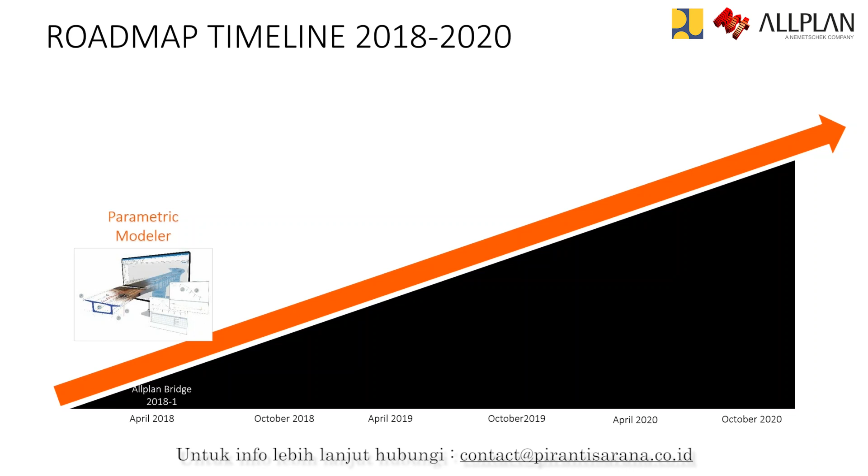It's fairly new software. It means it's very exciting because it advances quickly. The first version was released about 2 years ago in April. And at that point, you could do parametric modeling, and each 6 months, there is a new release where they build new functionality. So after 6 months, the second release, they did the parametric tendon modeling. Then they started with construction stages and cross-section calculation.

After that, they started with the analysis, so that was last October. And then in April, they did a new big step where they included live loads for your bridge analysis. Of course, there will be a new release with ALLPLAN 21 also in October, and new exciting things will be included. So we see there are really big improvements or additions going on because it's new software.

A lot of things can be added, and it started with modeling, and still modeling is improved. New functionality is added each release, so it's going quite fast. That means if you worked with ALLPLAN Bridge a couple of months ago, some new things will be there, and many new things, many exciting things are getting possible also in the near future.

When we talk about BIM for bridges, ALLPLAN also is working on including BIM for infrastructure, which is then included in IFC 4.1, if I'm correct. So they're working on that to implement it in one of the future releases.

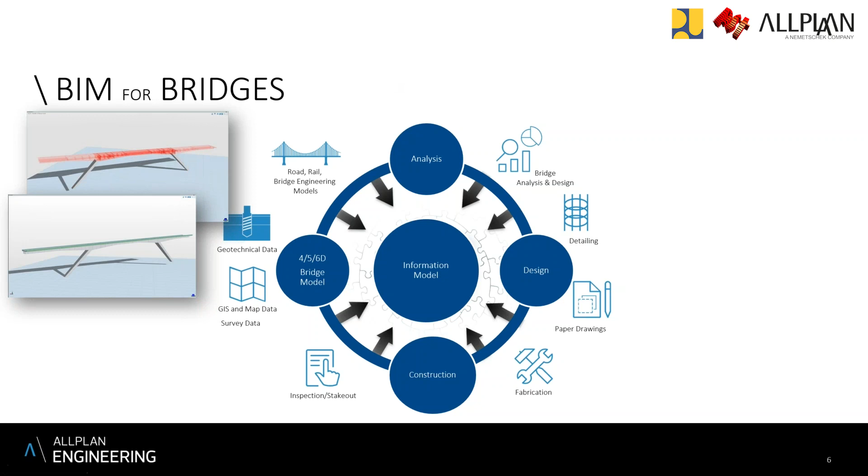Now, if we talk about BIM for bridges, we could do with ALLPLAN Bridge already the parametric modeling. We have the construction stages that can be generated. So you have some visualization. You can set this up. We'll show this later also. Analysis model. Then we have the analysis results that can be calculated. Also, with the link with ALLPLAN, we can do the reinforcement detailing. And there is one check which now has been included in the release in April, which is the reinforcement design and checks.

Okay. Now, for modeling advantages, so when you model, how does this parametric modeling work? Very basically, you have a cross-section, which is the profile of your bridge, and you have an axis, and everything is modeled along this axis. You can define then variations for your cross-section. You see here, for example, the bottom of the deck, the cross-section is being generated along the axis, but you can set variations for your different variables.

So you can control, and this is done in a very nice way. Step by step, you can introduce new complexity to your bridge. You don't have to start with a finalized design. You can start with a very simple cross-section and then add variables to it, add variations to it. So you gradually get a more complex model as you design it. So you design as you go step by step. So you have full control over it, and it's very transparent also what happens.

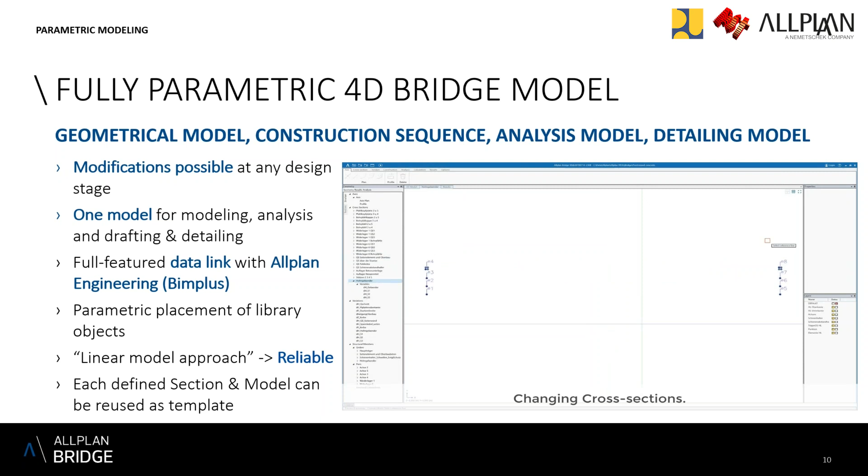With these variations that you see here, you modify something, the bridge deck will adapt to it. Your analysis result will adapt to it. The geometry that will be sent to ALLPLAN will adapt to these changes. So you control it fully by these parameters. You can see you can make the deck a little bit wider. You can add a parameter to it, so the width can also be handled by variations and parameters. Also other components like a railing and a guardrail you can add to a bridge deck as an additional component, for example.

What is also possible is with a link with ALLPLAN, you can have your library, let's say for bearings, lampposts, this is something I will show also in the last example, and you can add them to your bridge deck with the same principle of these variations, where you say, okay, at this point I would like to have a bearing, at this point I would like to have a lamppost. These are parametrically positioned in ALLPLAN.

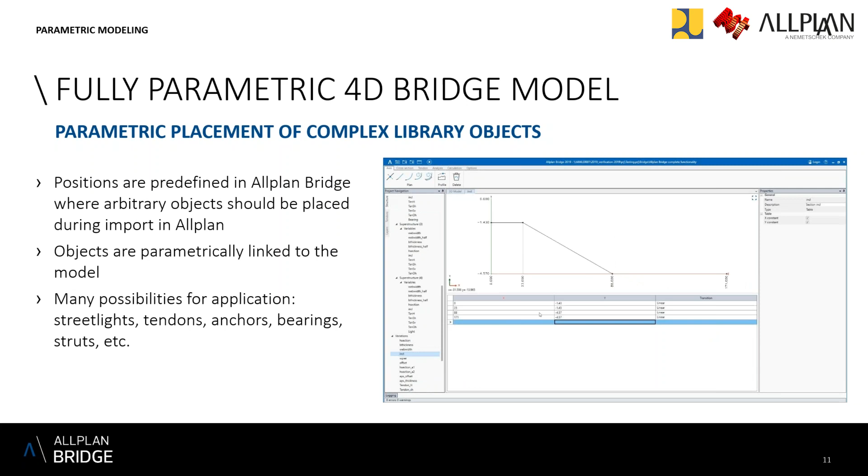So if you go to ALLPLAN and then you update your model, you will see that every object that has its origin in ALLPLAN Bridge will also be modified. So for visualization purposes, this is also important. If you change the axis of the bridge, for example, modify anything, then in ALLPLAN, everything that will be added parametrically with this library smart symbols will also be updated. So then you don't need to reposition all these elements, they just are placed by ALLPLAN Bridge.

For the tendon generation, they're based on a grid. So you can define a grid, and each of these points can then be a reference for a tendon. Same principle again, you can control the tendons with these grids and then define how they need to be used with offsets and different settings to the grid. And it's also possible to make this grid follow some variables.

So you can say, okay, I just define it and let ALLPLAN Bridge calculate the geometry for the tendon, but you can also say, I will control the tendon geometry by variation tables, where you control the height definition of the tendon. So here you can see it's just being copied along these tendon grid points. If you change the axis, everything will be regenerated and recalculated. So now there is no need to set any tendon because they follow their parametrical grids.

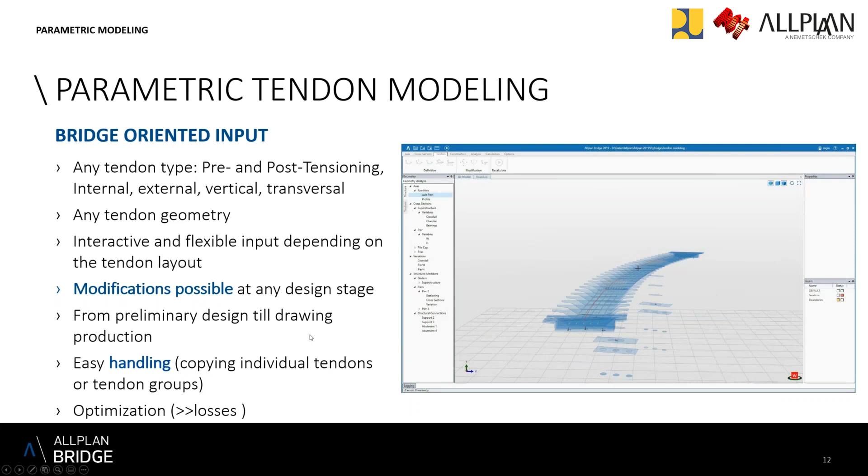If you have a tendon, then the geometry can be checked, and here you get the losses calculated. So you get a typical diagram where you see the optimal stress being displayed, but also with the slip that you have in the beginning, or if you stress it on both sides, you get different parameters. Again, the loss of the slip is being calculated. So from the tendon being stressed from one or both sides, you get a diagram that clearly shows what is happening within it. And this is also automatically calculated.

For a cross-section, these cross-sections can be generated from scratch. You can also say, create my own library, so you can easily reuse them again. And here you see it's a fairly simple cross-section, but has a lot of parameters. That means all these parameters can be variable. So you can say I have a typical cross-section, but that you can still modify and change to make it possible to have many different types of the same typical cross-section.

Also, for example, for steel cross-sections, there is a possibility to add the stiffeners, and this is a system that can be used also for other types of objects, where you define, let's say, a subcomponent, and the subcomponent can be used and then be placed as a kind of placement, like we saw yesterday with reinforcement. You have an edge and you place it along the edge.

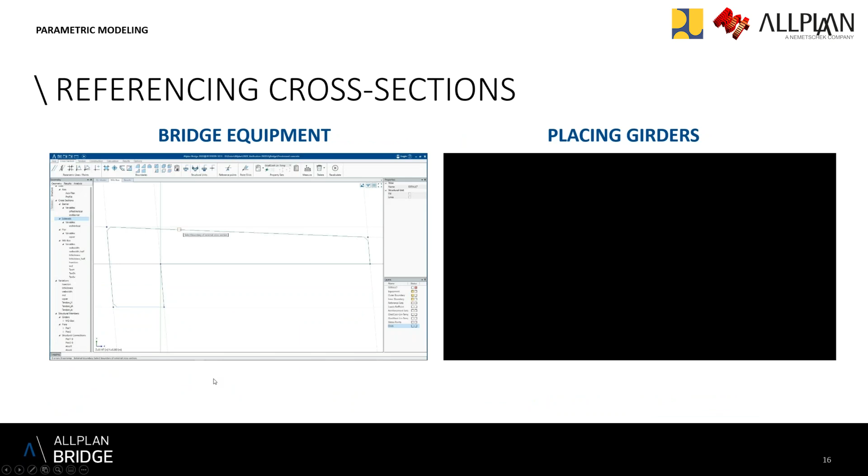Here we have two other examples of these possibilities of referencing another cross-section. So for the bridge equipment, like the sidewalks, things like that, this can be typical. You can take them from another cross-section and then insert them in the existing model, also like a barrier. So it's possible to reuse many different things that have been designed before, so you don't need to do this each time again, and you can take these basic components as a part of a cross-section and add them to your existing cross-section.

Same thing for girders. Depending on what type of girders, steel, concrete elements. You have your cross-section, define it, and then place it, and then if you update one, the other ones will also adapt, and you can then place it in your existing cross-section easily.

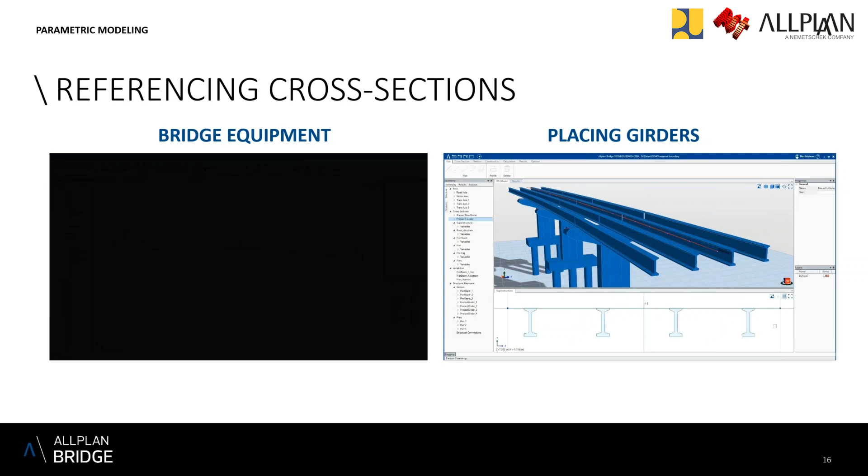Also possible for really complex types of shapes. Yesterday we saw the Tamina bridge. The supporting arc is actually also following this principle, where you have an axis, main road axis, but from the side you can also have an additional axis, which in top view can be a radius here also, and then also from the side view you have another radius. So it's possible to generate objects linked to multiple radii.

That means you don't have to define all the parameters, because this could be a parameter where you say this is the main axis, this is a width parameter, but then you need to define all these parameters. It's possible, but you can also say, no, this is just an axis that needs to be followed to the side. So all points here, parametrical points or lines, will be linked to this axis. So this is also something that adds a lot of flexibility for these complex elements.

Then we can define construction stages. So if you model your parametrical bridge model, you can then define how it should be constructed. This can be done for modeling only. So if you go to ALLPLAN, then you can see these different elements, and you can create a visualization from it with renderings, for example. Here you can see some kind of flow through the process where the different stages are being animated.

Important is these construction stages can also be used for analysis. So if you have a specific construction sequence with tendon stressing, for example, or cantilever, then this can be

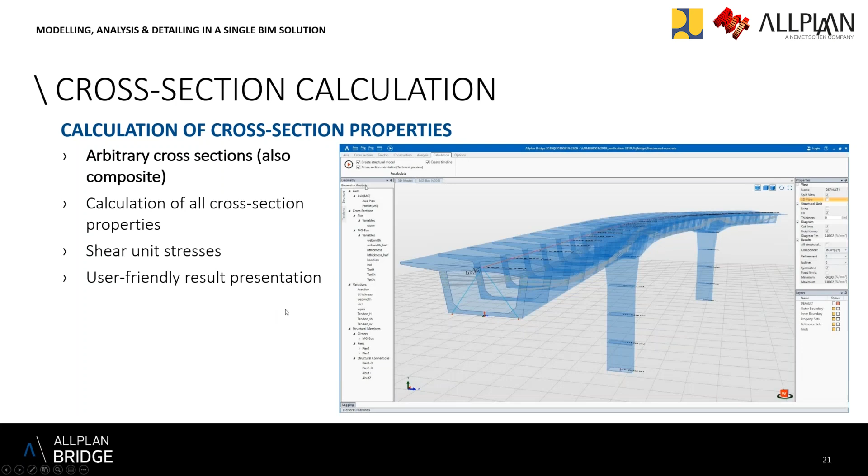For the cross sections, you have your bridge model, which has its cross section. These are also automatically defined as soon as you calculate, and for each variation of the cross section, for each station point where there is a variation, the cross section properties will be calculated automatically.

Here for the construction sequence calculation, it's already for modeling what this can do, and here you can see then a simulation where also the analysis is being included. So then you can see construction sequence, cantilever direction, and then you can see these forces being displayed.

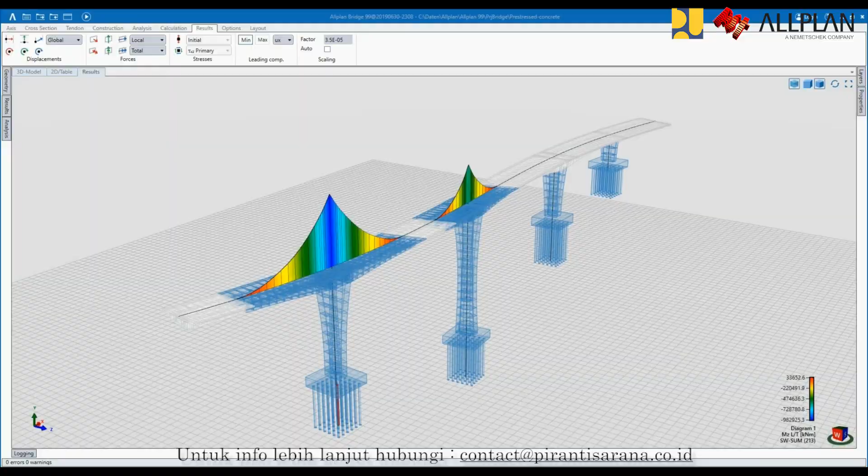Also possible with this is that you have multiple construction variants. So depending on the design or construction you choose, you can have variants which you can compare with each other. So if you choose one construction sequence or construction variant, you can simulate it, or you can have another one which can have a different order, and then you can compare them with each other. You don't need to create a new model. You can just create alternative or variant construction stages from one model and then compare the results and do some optimizations.

We have the superimposed dead load. So when you create a section, you can have in your cross section defined elements which are the actual member, or you can say these are additional elements which are just generating a load. So it's not part of your structure for the analysis that defines the strength of your bridge. It's just a load put on top of the bridge. And this is also done when you create the cross section. You can define this element, this barrier, is just a load.

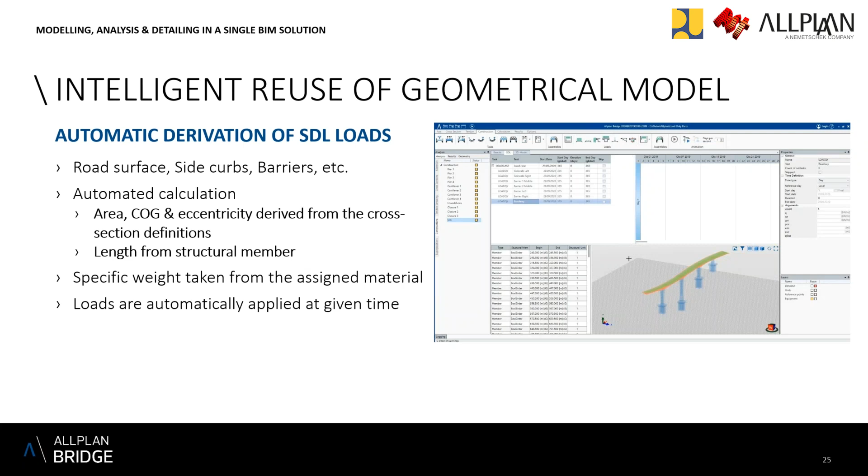Yes, and then it will be included also, for example, in your construction sequence, where this load will be set at a specific point in time. You see here, sidewalk, for example, this is just load that will be added to it. In the cross section, there is this color code also: blue is the general members and green is the additional dead loads being added to it. So again, you start from the parametrical model, the geometry, and then for analysis, the same information will be used.

Then we have the superposition, where you do the combination of different cases, and you can add this in an intuitive way, like visual scripting, where you make these nodes, connect them, and then make combinations so that only the worst case state will be used in the final analysis, for example. You can set this up and then reuse this combination or this canvas for other projects also. So you can create some kind of flow charts of how these combinations should act and how they have to be used, and it gives you a very good overview.

Presenting of the results: for the analysis, based on your 3D model, you can activate the representation, so you can see a deformation, for example, depending on the different envelopes that you have defined, like temperature or wind or the sum of the loads. And then you can also define color coding by the surface or use some diagrams. You can choose which combination you would like to see, or multiple of them, one next to the other, and then you get a good overview of this representation.

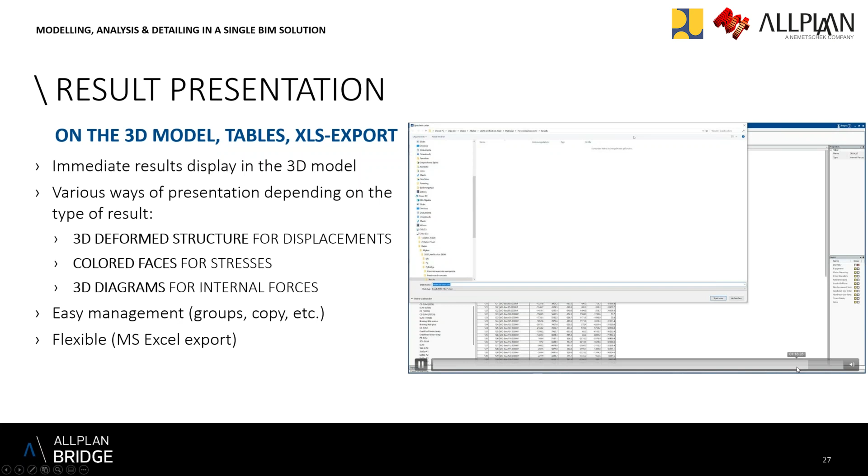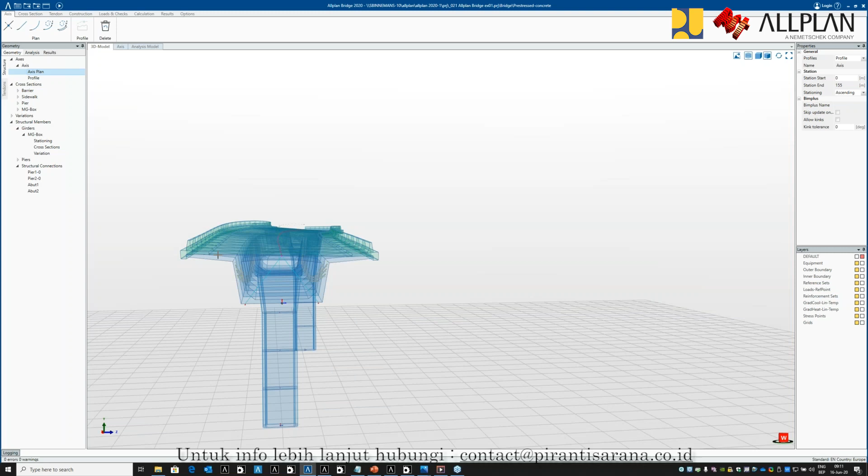So here now we see that the bridge has changed. We see that in this case, the axis has changed, but the super elevation at this point is not right because it is for a turn that goes the other way. Okay, you can have control over all these parameters individually. If you want, you can also link different parameters with each other.

Maybe at this point, because I rechecked the analysis model, for the analysis model, we can also go to the results, for example, of the cross section. So here we have the cross section and we have the different variations. And if I check here variation, then you will see this display of the cross section calculation with the different values. So you get this here for each different variation.

Then you can see clearly also how the super elevation changes, how the height of the cross section at that place changed. So you see it very well, which one is being used here in the 3D model, and you get the results right here and all the values. Okay.

So let's do another check here. I'll first generate the geometry again, maybe change the axis back to its original value. So minus 200, enter, and then we can see the original situation again. We have the axis, and at the same time we have the profile. So the profile is along the length of the axis. It's 155 meters. You can set heights.

So if you check the results, for example, you can choose to highlight different combinations. So let's see if I have my analysis model. There, yes, okay. So we have 3D model, analysis model. So depending on what combination you choose here, you will get a different part of your model and different visualization.

So for example, here in the bottom, I would like to see the wind loads. Different types of combinations have been set here, without traffic, with traffic, for example. So we can highlight it. I don't want to see the diagrams, for example. I would like to see the deformed structure, and then you choose here what case you would like to have, and then you can visualize these different parts.

Okay, so if I go up again, we have here the tendons, temperature, braking, wind, so different types of elements that you can visualize. And here you can choose then what load cases you would like to see, for example. And then depending on the diagram you activate, you will see some different element. Yes, so you have full control over the different parts, and you can just activate which one you would like to see.

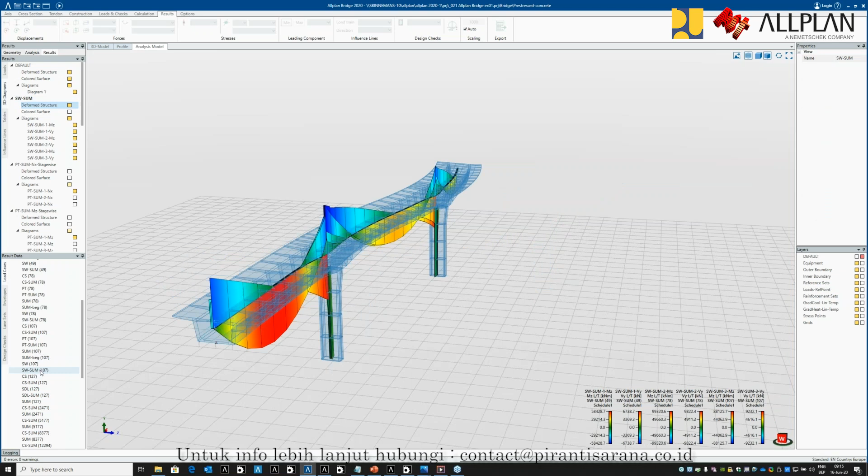Okay, so here you can see, for example, the deformation also being set. You can play with these values to see exactly how it's represented. And then, for example, I don't want to see these diagrams. You just want to see the deformation type for wind, for example. So you can choose what elements you would like to see, how you would like to visualize it to give you a good impression of the things that will be happening in your model, and compare the analysis results.

Okay, so let's go back to the 3D model here, the geometry. So we've seen axis and plan. And then the next step would be taking a look at the cross section. So in this cross section, main girder box, you can choose any type of name you would like. And here we have all the different elements that are defined in the cross section. So we have our main girder, and then the additional elements being added to it, like a barrier, for example, which are not part of the structural element.

Everything is defined by reference points and parametrical lines. So you see here these gray lines, parametrical lines. What does that mean? It's how I can control how this section behaves. For example, the one here in the bottom, if I click on it, you can see possibilities, and I will change the distance. And now if you change the distance, you see what happens here.

The web on the side will just keep its own orientation, but the main girder will become higher. So the cross section will become higher. But if you see, also the bottom will actually become smaller or less wide because the angle of the web is fixed. So you can define also how the different elements should behave.

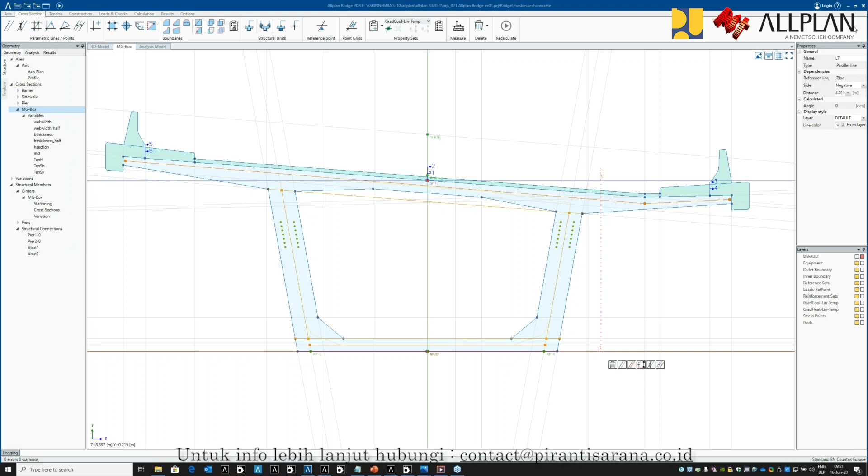So cross-section, main principle: you have your parametrical lines and reference points. You then define a boundary which uses some of these points, and the relation between the parametrical lines will be kept and will define how your cross-section will vary. So we see here, this is linked to a variable, and I would like to move this part somewhere down. Yes. So you see here that this is linked to a parameter, height of the section.

So what does this mean? I can define in my main girder a height of the section, or whatever name you give it, doesn't matter how you name it, which has its own, let's say, default value. And then when you assign this variable to a parametric line, you just do this also here.

You can say, okay, it shouldn't be assigned to any, or it should be assigned to the height of section variable. That means you can control it now outside of your cross section. If there is no variable set, then it's just a fixed line. You can modify it here, but you cannot control it.

So this is important when you design and get more detail, more depth to your model, that you will be adding variables to it. You don't need to have it, then you get a fixed model which doesn't vary along the axis, for example, but you can still modify it here. So if we check again the main girder box and the variations, so we are in main girder box cross section. This is the girder.

So if you check the cross sections, we see here again which cross section is applied with the variance and variation. Then we can see what variables from the cross section are actually being used in this 3D model. So here we see height of the section, which just comes from the cross section. Actually, each one of them will be visible here. So you see web width, half, bottom thickness. These are all variables coming from your cross section. So if you generate it in a cross section, this will be automatically added to the tables here. You don't need to do anything.

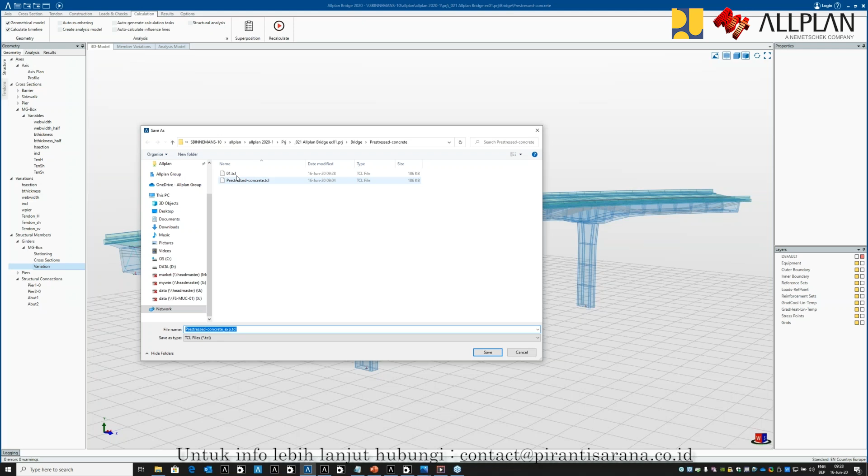What is also interesting is that ALLPLAN Bridge has an open interface through a TCL file. This is a text format that you can read and just modify. So if you want to have external access to this file, you can save this project here, let's say as 01. And I will also open this file with a text editor. And then you have all the descriptions here, from the axis, from the cross-section, from the variations, described in this text file.

So you see, okay, this is the axis, the profile being described, and here we have already the variation. So the height of the section, we see this is this 8. So I can change this in the text file and put it again to 5.2, for example. That means you can copy paste things from other software. You can also play in this text file to do some optimizations, for example. Okay, so save the file, I don't need it anymore.

And now I can import it. So remember, this is this 8 meter. I can import this file again, just modified externally. Do I want to regenerate and overwrite? Yes. And now the full model will be regenerated. And now you can see again that this is the correct height. So this can be an interesting case where you have this open interface that you can use to change the values and adapt some elements just by accessing a text file.

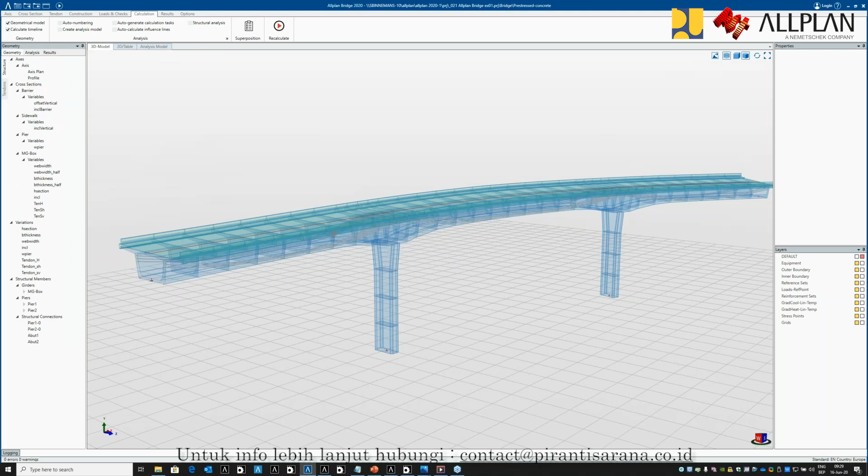Okay, about the tendons here. So we have the tendon generation. We saw in the cross section that there is the tendon grid, a point grid here, and the tendons are used. And when you define the tendons, you can choose what point will be used. So let's take a look at that. We have these tendons here.

You can see that it seems there are redundant points, but this is because you have different stages and you also have tendons which are overlapping. So probably stage 1 goes there, where you have the end of these tendons, and then you have another where the tendons are already embedded in the structure for the next stage. So these tendons are defined on the points, and because you have multiple points, you can choose which one you would like, and then you have enough space for the other tendons to go in between.

So it can also be controlled by parameters if you need more distance. I think we will see this here. In the middle, they will be very close together, and here where you have multiple tendons connecting together, you have a bigger distance between them. This is also controlled by the variation tables.

So you can define a tendon in different ways. You can set it through points without having the points varying, but here you can see there is some variation going on with the height of the tendons, probably with the distance between them in 2 directions, and this is what we've set here as a variation table.

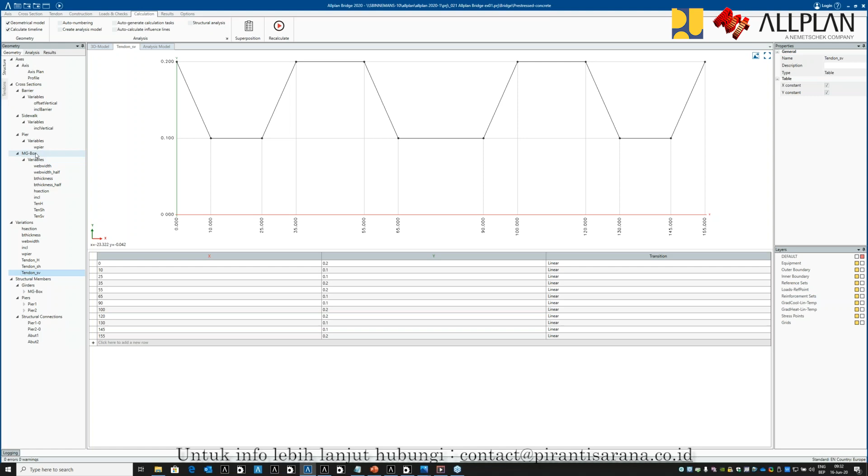So same principle, if you check again the section, like you had with the parametrical lines, same principle is here with the point grid. You can see the offset here, or spacing, is defined by spacing horizontal, and spacing here is controlled by spacing vertical. And then the offset that we have here, there is no offset horizontally, but there is an offset vertically. So this is the height of the tendon grid, where it's positioned so that it flows along the 3D model from the start to the end.

Yeah, so same principles of the parameters and the variations that you can set. You can start with a very simple cross-section and add to it for the geometry, add to it for the tendon grid, and then add variation tables to see how they will be controlled.

Now let's dive into one of these tendons. Here you would like to have, maybe depending on what kind of construction you want, do they need to be stressed? At what point do they need to be stressed? Do you need to have blisters or a wall where this web would be thicker, so the tendon will be outside of the wall a little bit, so you can still have access to the anchor and stuff. This is what we will check now.

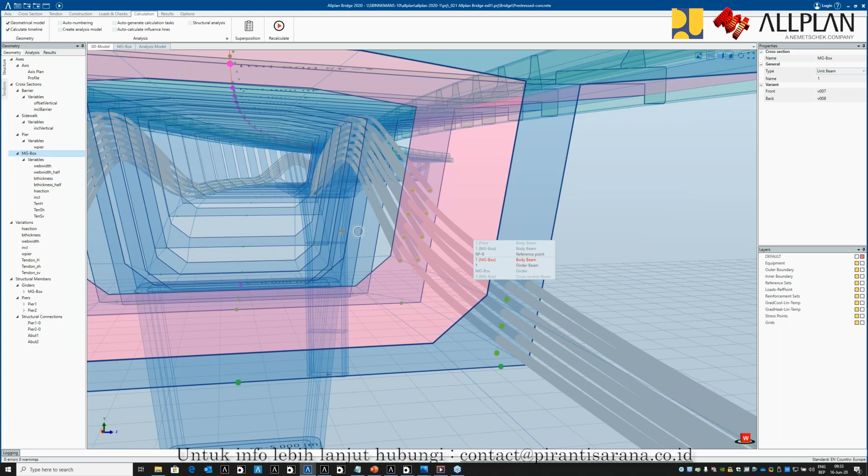So for the tendons, you also have different phases for the stressing and stuff. Let's just go in the modeling of the tendons here. So we have the view of the tendon model, where for each tendon, let's take this one, for example, you see this tendon being highlighted, and you can see also its parameters. So at this station, which grid point it uses, you can see it here in the cross section, and then you can go through the different sets.

So if I look from the side, for example, you will see that it jumps from one point to the other point for each segment, and then you can check here where it's located, and here also, so you can see it going through these points, and this is what the tendon will follow. You can still interact with these points, so you can even change the grid point, that reference point that the tendon uses. If you want to switch it from there to there, you still have full control over it at the end.

An example that I want to show here is for this tendon that we have here in the middle, for example. And I will zoom in on this number 4 or 5. So this tendon here at the top. I'll zoom in a little bit. So we see this tendon here. And then I want to see where it will be going on the inside of the wall. So we see here it's still inside of the web. And I would like it here to jump a little bit on the inside.

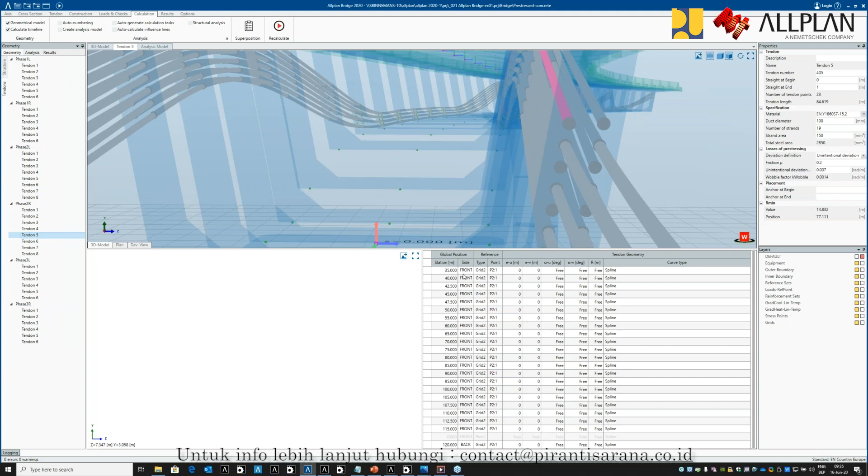So what point do I need? I can check here from the station point. You can see here this is this point, and now I can change a value where it should deviate from its position defined by the grid. So let's say this should now, and I always forget if it's plus or minus, be 1 meter to the side, and then you can see here it will be located there.

If I regenerate, maybe this is a little bit too much. Let's say 0.5, and recalculate. Oh, sorry, that's the wrong recalculate. Then you will see it being generated. So here you can see now that the tendon is positioned there. I wanted to show it right here in the tendon geometry definition. So there you can see also that it's now being positioned like this.

It will still follow the grid. It's just that there is now an offset defined. So no need to define this in the beginning. You can change this afterwards depending on information that you gain, like anchor type or whatever you need to be able to construct them, to see this also in a detailed model. So you have full control over all these things, all elements and all parameters.

Okay, I think this is enough here. Maybe there is some result for the tendon that I can show? If I select it, a PDF document can be generated. I'm not sure if I did the analysis.

So here you have the overview of the tendon definition, and you can also see how it's being generated, like a table and a schematic of this tendon. Same thing that I showed in the PowerPoint. The tendon losses can also be generated.

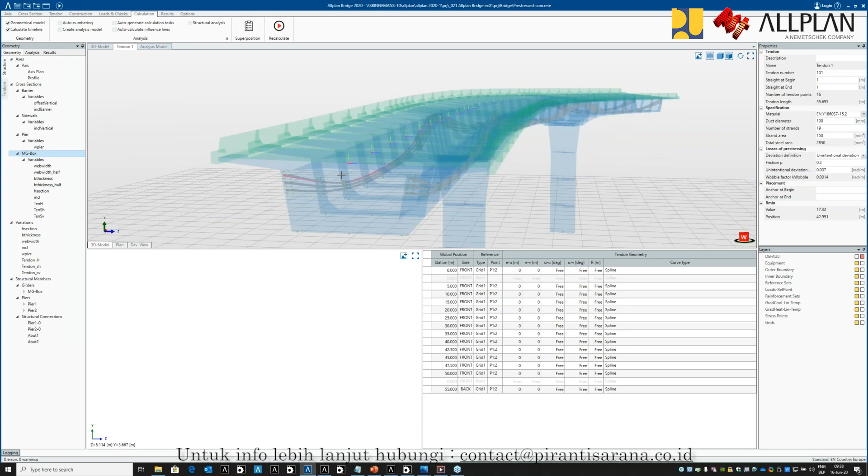Because if you want to have the super elevation, you need to have the speed set, the type of vehicle set, the surface set. This is not something you calculate in ALLPLAN Bridge, if I'm correct. You can just define the super elevation in any way you like. So if somebody does the calculation and says we need 3% here or 5% or 10%, you just input the values and the model will be generated depending on these values.

Can you show how to create the super elevation in this model? Yes. You don't have to do this in the beginning. You can add this later, but you need a definition of a parametrical line which defines the inclination or the super elevation. In this case, this is implemented, and this is the line that makes it possible to define the super elevation. This is the line that can rotate or change the inclination.

There is also a parameter set to it. If you check here, we can see this is the inclination. And you can say it should be a fixed inclination here. Doesn't matter too much right now, this is just a definition. What is more important is that when you have the inclination, you can control it through this variation here.

So now we said we have an inclination. I think this is in degrees, where it starts at station 0 with this value, at 15 meters this value, 8 meters this value, so it just goes from this value to the end. And this is what we will see in the 3D model. But if you change the axis, you should also adapt this. So here we have the super elevation right now.

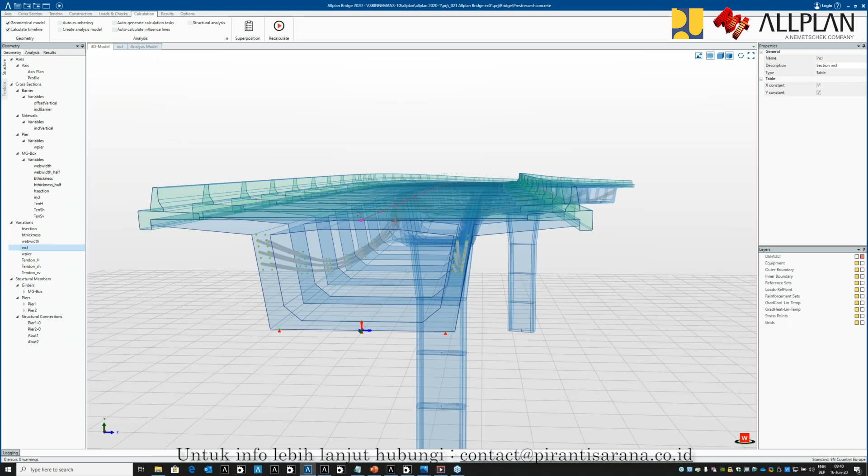And then you can change the inclination again and say at the beginning I would like to have -2, -2, and it should go to -8. Something like this. So you can control it with different values at any point. You will need to add the station points. Mostly these are not too many: you have a straight line, a clothoid or spiral, and a circle. For these points, you set how the super elevation will change, but you have full control over it.

So it can be on a straight line, for example, you can change from minus to plus. It's just that you need to input these values here. And then if you regenerate now, the model will take into account the super elevation that I've set. So you see here now, this is -2. On the other side also, this is a little bit more, this is -5. Everything will be regenerated. So it's just a question of adding the right value to the table.

But it's user controlled. So the user has control over this. If he wants to input a negative or in the wrong way super elevation, this is possible. Yeah? So it's up to him to define the right values here. That's the answer to the question? Yes.

Is it possible to show how to import LandXML, let's say, into Allplan Bridge? This will be shown tomorrow. I can quickly show how you would do it, but I will not do it because then I will need to generate a model, but we have this prepared for tomorrow. So this is done by Bimplus.

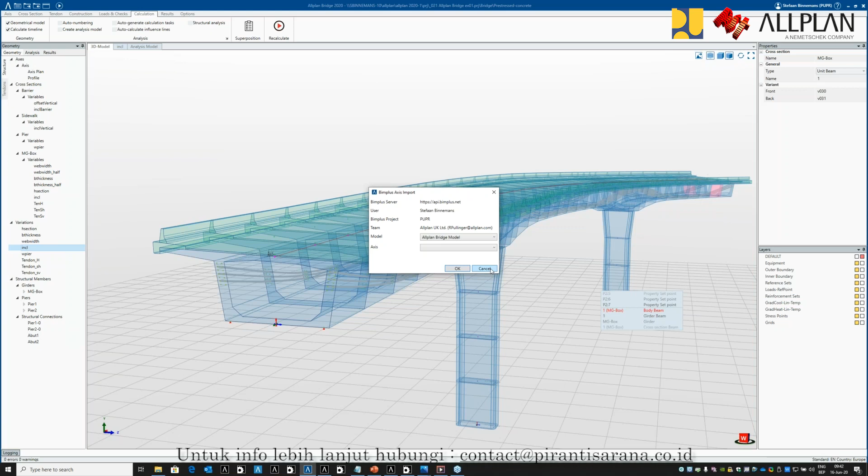So the thing is, this is generated in Bimplus. Somebody uploads the axis in Bimplus. You connect here to download it, and then it will be used. The horizontal axis in plan and the profile will be used. You can have multiple axes that you import, and they can also be updated. So if the model updates with a new revision of the axis, you can also update it in Allplan Bridge. So the link is done here through Bimplus. Yes. So this will be shown tomorrow. Okay.

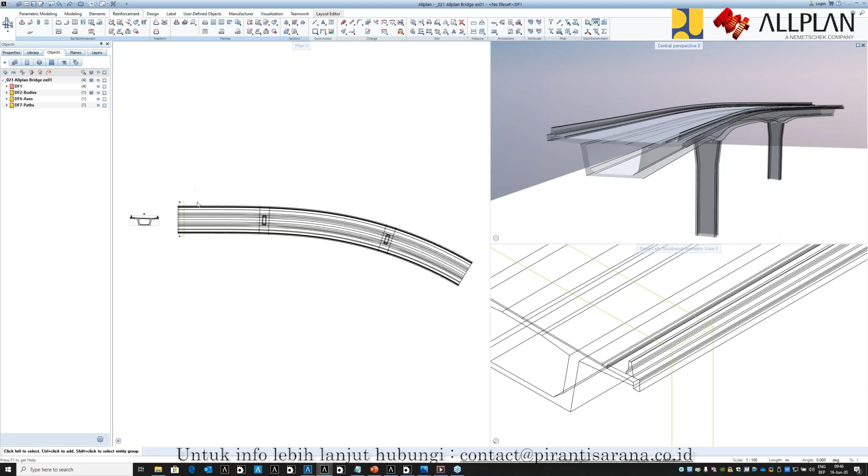But what I'd like to show here is, remember yesterday, there was the sweep functionality that I've shown, and it uses edges. Now, what is interesting from Allplan Bridge, you can see these lines. These are actually the edges being generated in the Allplan Bridge model. So they can be transferred. If you prefer, or there's a setting, you can transfer them to Allplan and you can use them to create your rebar.

So when you generate a complex double curved model in Allplan Bridge, you don't need to define these edges by yourself. They are just transferred, so that makes it efficient to reuse them for your, let's say, typical reinforcement in that section. So I have here a section for the bridge. I will just define a bar shape, not a realistic one. It's just to show how you can control these edges. So I will create it here in this section.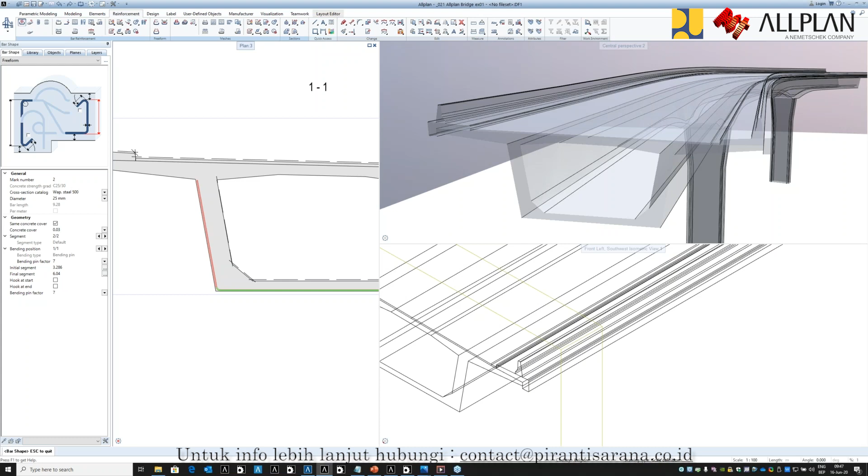And right now you see it will follow this edge. So here at the top, this edge, this one in the bottom here, and then this one also in the bottom here. So we'll see this variation going in height, in width, because it's getting a little bit thinner here at the bottom, and so follow also the orientation of the web and become then higher here above the pier. So we have a lot of variations, and the axis is also double curved.

So we will use this same sweep as yesterday, sweep bars along. So choose the bar, and now we have to choose the axis generated by Allplan Bridge. So the main path is the main sweep here, the 3D spline. This is then the axis. And now I will use the other parts to define the geometry. So this one here, you can see that it will go from the start to the end. In Allplan Bridge this is segmented, but you can select it easily all at the same time.

So select this one here, you can see the top, do the same thing for the one in the bottom, and then you can see that it follows the bottom curve, and here the edge on the side also for this one. And then you can see this is also following this curve. So now I will create a 3D reinforcement along this axis and following this definition of the edges.

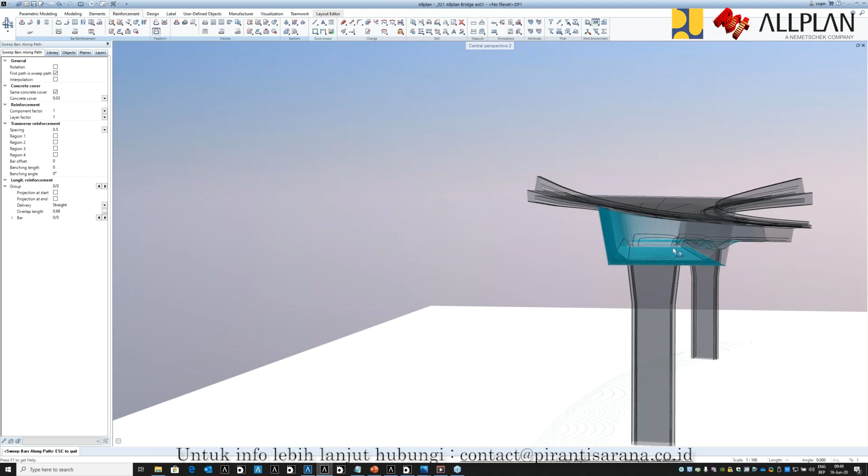So, okay, let's say change, so this is now 1 meter, it should be 0.5 meter, for example, and then you can see here that everything adapts quickly to it. So you see it follows the edge here, follows nicely the side, it follows here the bottom. So we'll make this a little bit bigger. So with just a couple of clicks, you reuse the geometry definition from Allplan Bridge to create reinforcement in it by just clicking the edges.

Okay, now let's go to the examples. First one would be this cable stayed bridge. This is not a real bridge. It's just a design based on an existing bridge that has been reproduced in Allplan. So actually everything that you see here is generated from Allplan Bridge except for the water surface. This was just something in Allplan.

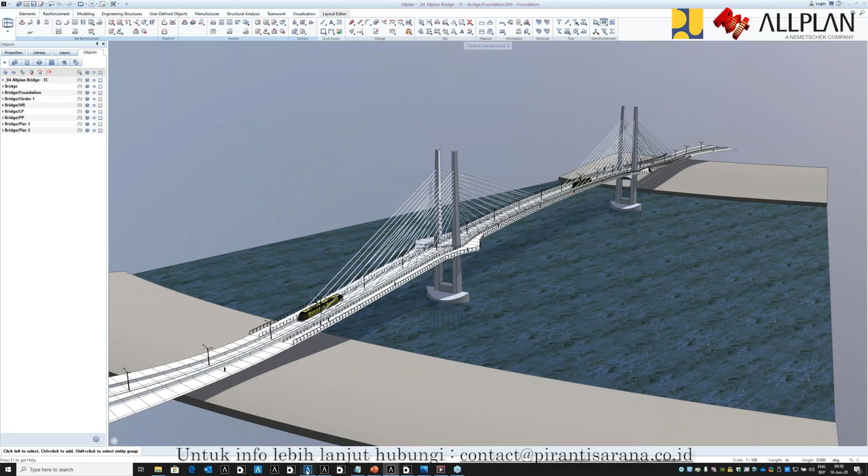But what you see here is you have the rail, the railing, handrail, you have the cables, you have lampposts, you have vehicles. Everything is generated from Allplan Bridge, with this smart placement. So it can be quite detailed. And it's parametrically designed. I will now show this in Allplan Bridge. So open, see if I have the project ready for it. I will get just the TCL. So import TCL. And so, yes, open the TCL.

Now we have this model here. So what I would like to show here is maybe the different parts. What you see here are multiple axes. So I have a main axis for the bridge. I have one for the bottom to define the positioning of the piers, I think. And I have a secondary axis. And imagine in this case, you have your fully detailed bridge, which can take some time, but then there is a modification in the axis, or there is a variant axis, which is also interesting because you just don't want to modify the axis.

Maybe there are two positions where this bridge could be created with two different axes. And then I can modify this, so here we can see there are two axes, main axis 1, axis 2, and this is the bottom. And let's say I would like to have everything moved to the other axis.

So my girder, oh, this is the people placement. In Allplan you could see there is this person object being placed along the bridge. So this is with a variation, the train, the lamppost and stuff. So there are different elements in Allplan Bridge; you see all these black dots. These are actually the smart placements. So maybe I can go into detail a little bit.

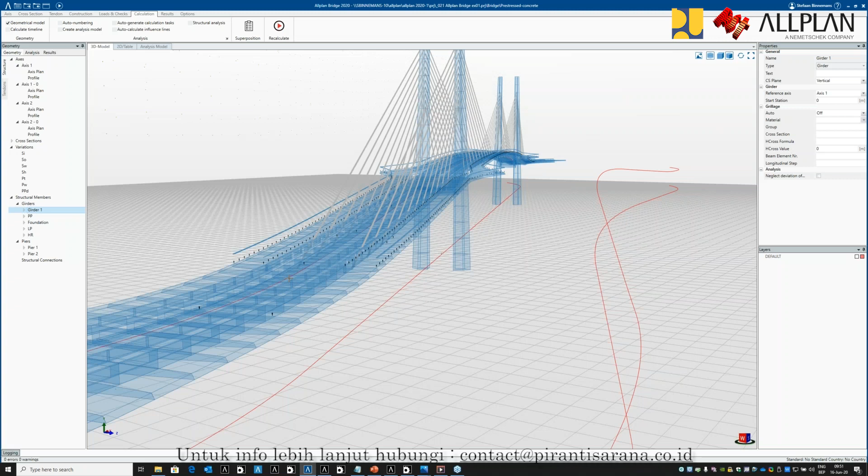This is the handrail, for example. Then you see in the variation that there is a handrail, and this is where the handrail is positioned. So at every station there is a handrail positioned. For example, if we take a look at the lamppost or the persons, here you can see where they are defined. So again, controlled by a table.

Now let's see what happens when everything has been defined, like the main girder, the piers, the cables, if I change the axis. So I have here my different elements. I just select everything. You can see here girder 1 is linked to the axis, so I can choose a different reference axis. I will select everything here. It should be reference axis 2. And the foundation should then be linked to this one in the bottom.

Okay, so now if I regenerate, the model will be regenerated along the other axis, and everything will be recalculated. All positions will be regenerated, like the positions of the cables and the handrails. We can see that the axis is different if we look from the top. The start is similar, but this one is straight and this one goes to the right and then to the other side again, but everything follows nicely.

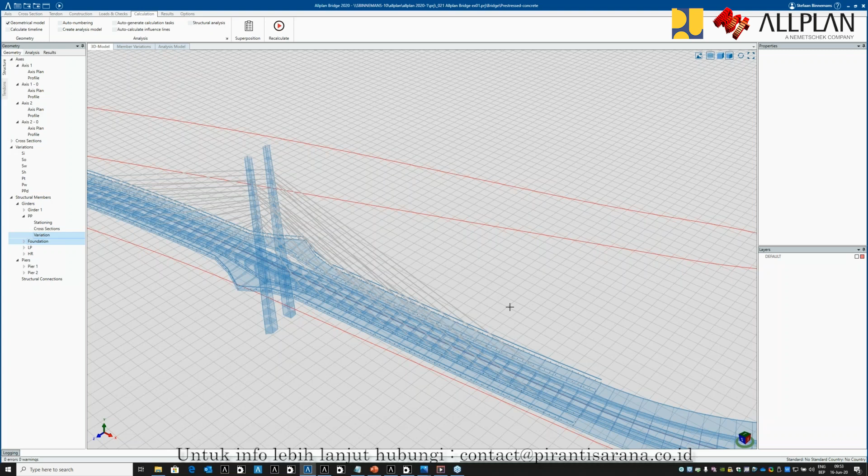So I can quickly change this again. Let's set everything again to axis 1, variant 1, and then the different elements, variant 1, regenerate. And then you see it's being regenerated again at the original position. Oh, didn't work. Like this, yes. So this is something that can be easily done. Okay, let's go to another example. There. Go ahead.

Okay, one thing before, there is a question. When you create girders in Allplan Bridge, you already create them segmented, but when you import to Allplan Engineering, it becomes one. Is there any way to make it easier to be exactly as what you model in Allplan Bridge? So there is the difference between a general model and what you would like to see in Allplan, which would be construction stages.

And if you define construction stages in Allplan Bridge, maybe I will just take another example. So if you go to the construction stages, there you define how the element will be split into different segments. So we have another example here. Let's take a look at the construction stages. You see there are different phases here. Oh, that was not the right one.

So we have these different phases, and each phase will be a different object in Allplan. So this could be a way to split it. If not, then it will just be one main girder. If you do it by these construction stages, then this will be split. So now we play the full construction, and you will see the pier being generated. Maybe I can make it a little bit quicker. This is one segment, this is another segment. So each object will be its own element in Allplan.

So this is a possibility, and then we will jump to the deck. Here you also see a pour. This object will now be one segment because it has been defined in the construction stages as one pour. So I would say the construction stages for the modeling detail is where you define how the different segments will be created. Or this is one way. Yes?

Okay, go to the next example. Same thing, this is not a real bridge. It's based on an existing bridge design and just remodeled in Allplan Bridge to visualize it. Here you can see this is about 800 meters long. It looks a bit like the elevated highways we see a lot in Indonesia. Maybe the span is about 130 meters. I think that is similar to what I've seen.

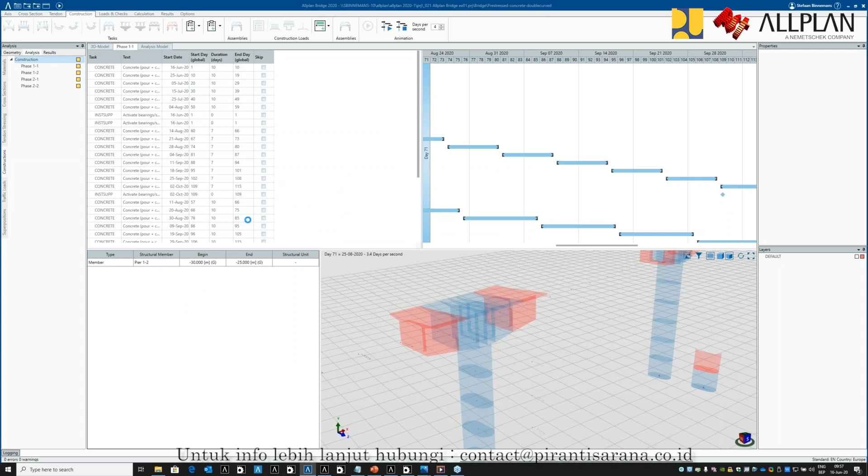So then you get this model here in Allplan Bridge, where you just have a cross-section defined, main cross-section of the bridge, for example, where it's like double deck or two girders, but can be actually constructed as in one sweep because the axis could be the same at this point.

And for the piers, we have a couple of cross-sections because there is some variation going on. So if you check here, there is a variation. Maybe I can turn on this here so you can see it a little bit more clearly. So there is a part where this is closed, there's a part where this is open, and then there is a part where you have another type. So this is one pier generated, but with different cross-sections.

So if you check the pier in the bottom, that would be this cross-section. Yes, here in the bottom. Then we have the pier at the top. So that would be this cross-section that we have here, where it's split. And then we have a third variant cross-section where actually this is also split on this side.

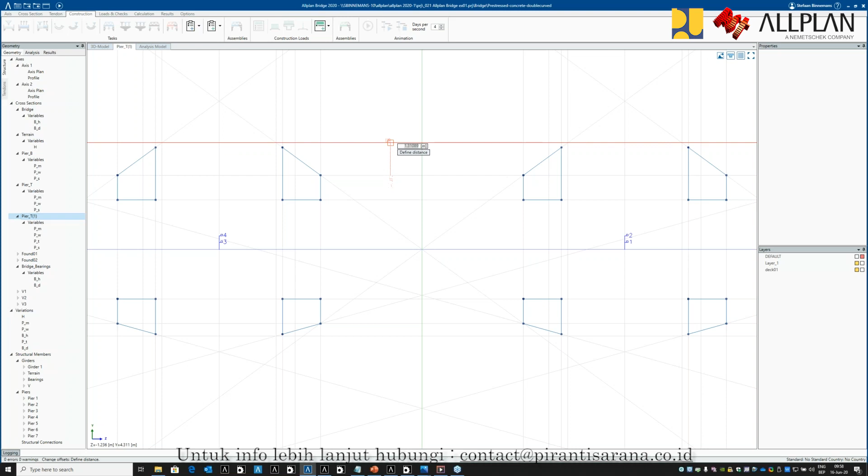And then again, depending on the parameter that you use, not sure which one it is here, you can control, for example, here also the angle. And depending on how you set this, you can see here at the top, all 4 edges have this, but you can also say when you define one here that all 8 edges will follow this angle. So there are multiple ways to define how the geometry should react to it.

Okay, let's go to a step-by-step example. Okay. So I will maybe first show the example. Open, so it's this one here. It's very simple, but allows me to show all the different steps. So something like this, where we have one main girder, not too complex, with one pier, and then we will add variation or detail to it.

So we'll just start with a new project. So there, new project, okay. And then we have our steps that we discussed before. So to be able to generate something, I need to have an axis. You can define your own axis or import from a project where the axis has been uploaded in BIM+. So we'll start from scratch here.

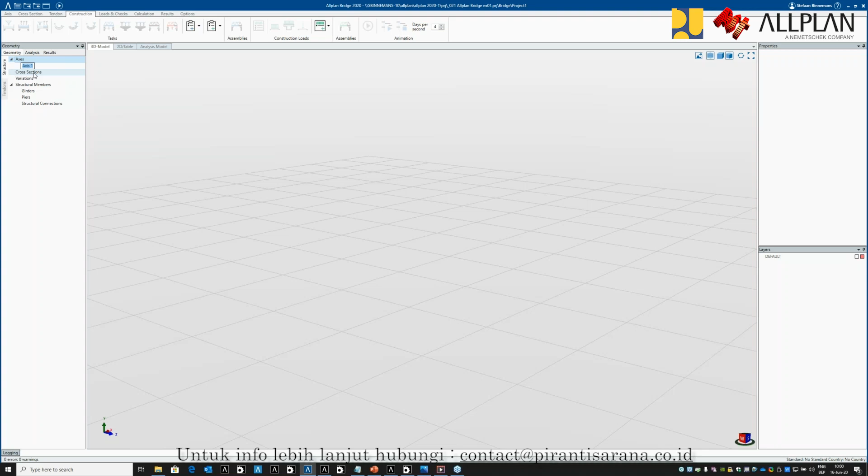Axis, create new axis. Axis 1, you can define the name. And now I will define the axis in plan. So in the action bar, I go to axis. This is my starting point, okay. And I will now define the first element, which would be an arc. And then you see you have the parameters, length, let's say 35, and radius 300 meters. So the first segment will be generated.

Okay, then you can say, I would like to have another segment. In this case, I would like to add a spiral with a specific curvature. So the radius, or 1 divided by the radius, in the beginning, and at the end is 0 because it will connect with a straight line, and the length will be 40 meters. And then I will add a straight line to it, and this will be 35 meters length. So this is part 1.

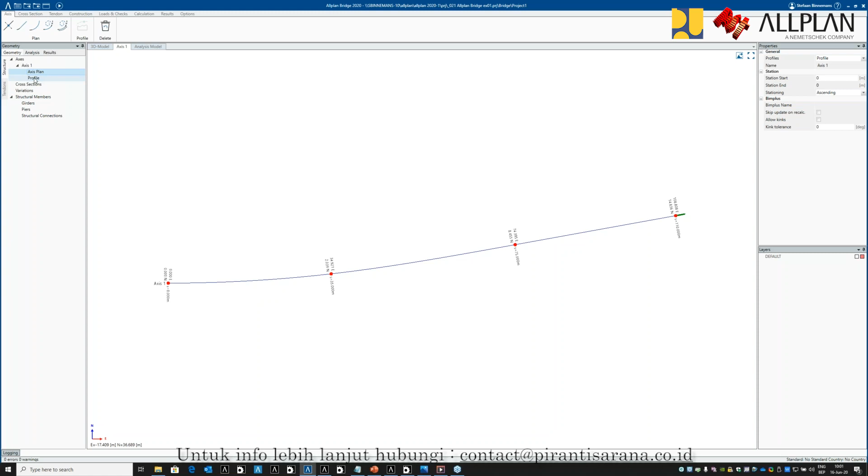I need to have a profile because I need to have a 3D axis. This is just a 2D axis. So I will make a profile. So first point, zero height, not necessary to set anything. And then I will take the second point, which will be, let's say, in the center. So the deck is 110 meters long, so 55, and the height will be 1.25 meters. And I will not set any radius right now. I will just add points to the end. So okay, then we would have an axis like this.

So let's check this in a 3D model. If we get the axis, then you see it's curved, but it has from the side, of course, this steep angle that I don't want to have here, so not a smooth connection where you have one going to the other. So I need to modify this, and you can do this while you create it, or you can easily modify this afterwards also.

So you can choose here. I have a rounding type, let's say intersection of tangents, and I will define now a radius of 1,200 meters, for example. And then you see the radius being generated. You see also station points. They will be added to the axis, so you can easily recognize them. So here you see now the axis.

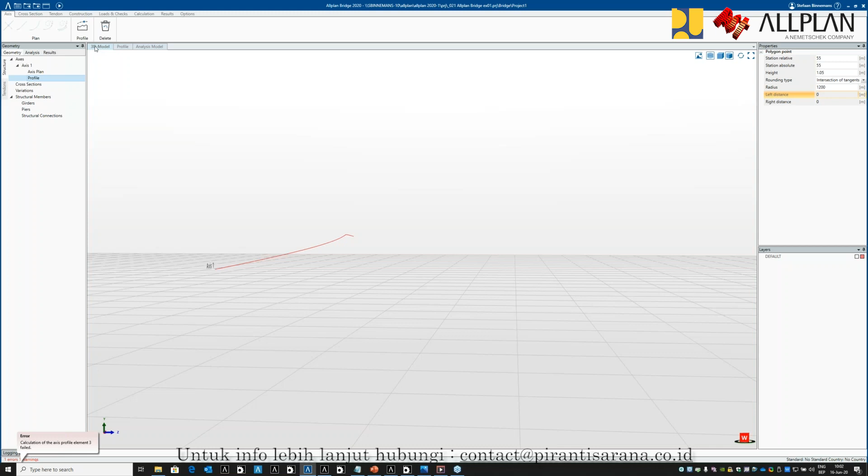Yes, so it's now smoother here also at the top. So this is step one. Now I need to define a cross-section. Cross-section, new cross-section, name, define anything. And now I will create here a cross-section with parametric lines.

Nothing special, just starting by the main width of the deck, let's say 4 meters to the left, and also here from the main reference point 4 meters to the right. So this is the width of the deck, and let's say I have deck thickness at the top of 0.25 meters, and from the bottom, and now it gets interesting because I can define what should be the distance.

Let's say, and maybe I can just show how it works here, I will choose a height of 1.65 meters for the deck, and I will continue a little bit, and then I will show how this relation is being set. So width of the girder in the bottom, 2.2 meters, something like this. So now we have an outline already, and I can define now a boundary.

So boundary, just click the points that you need to have. Boundary, okay. This is a boundary. To be able to generate something, I need to make it a structural unit. So in this case, I say this is my reference point and this is the boundary, and then you will see it being filled with blue.

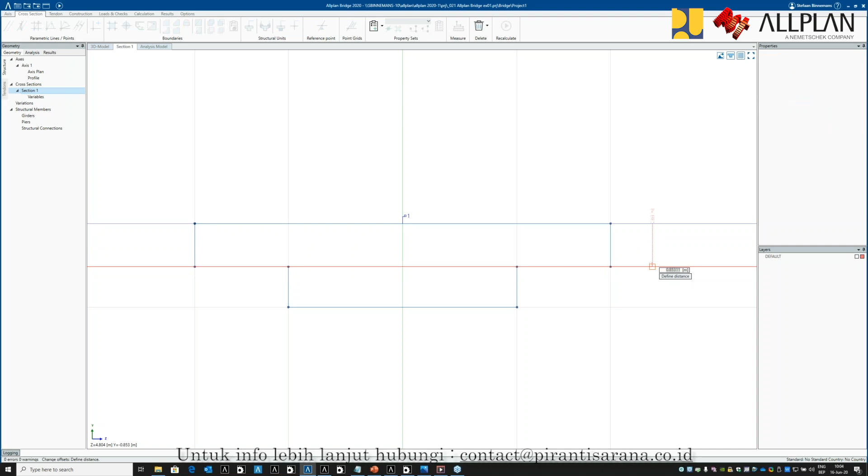I can choose here that my reference line should be different. I want my reference line to be the actual main reference line. That means if I change this right now, okay, this still works fine. But if I would change the thickness of the top slab, this will have no effect on my bottom. So this is something you can choose. You can choose the relation between the elements. If this needs to be linked, then certainly you can do this. I would say in this case, it's not necessary.

Maybe I can change the value here to 1.9 meters, just for representation purposes. So this would be the fixed distance that I set here. And maybe later when I introduce a bottom slab, I would like to have the bottom slab following this line and not the top line. So these are things that I can play with. So right now we have the cross-section.

For our 3D model to actually show something here, we need to assign the cross-section to the axis. So for this we create a girder. So new girder, name anything, main girder. Choose the cross-section, and then you see here the preview, and you can choose from what station. You can just click a point, and then the one that you click will be highlighted, and you can enter the value here. So this is station 1.

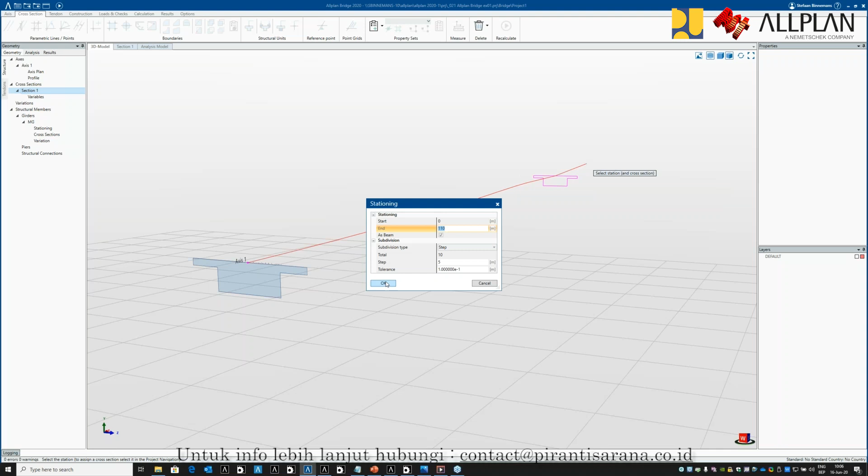Oh, sorry, first cross-section, but 0. And now you can go to the end, and then you can also enter this value. So if you want to have another station point, you can just click anywhere and just write the value there. And now we can choose the steps. So step would be that there is a segment, or let's say station, created each 5 meters. You can add stations later. You can do it in one step, or yeah, let's do it just now.

This is fine. And then the 3D model will be generated here. And now you see, for each 5 meters, we have a station to the end. Yes, there are also some different ways to visualize what you see in this 3D window, what type of elements you would like to see, for example.

Okay, I see here something I forgot to mention in my presentation. Since the April release, if I'm correct, live loads are included. So you can have your bridge deck, and then lanes can be defined automatically, or by saying what width you should have. You can create these vehicle trains or load trains where you assign them to these lanes to have this dynamic calculation. Sorry, I forgot to mention that.

Okay, so let's continue here with giving more depth to the geometry. So the axis is okay. We have now our section, main girder, but I don't want it to be a closed section. It should be an open section. So you can still modify all these things.

So go to the section here, and I would like to add now some, again, boundary lines or parametrical lines. So 0.35, this one here, 0.35. And here from the bottom, maybe 0.3. So now it's important that I choose the right line. If I set the bottom edge coming with a relation to this one, that means it will not follow the bottom of the height of the section. So 0.3, that means as soon as this changes, you see the other line will follow this line.

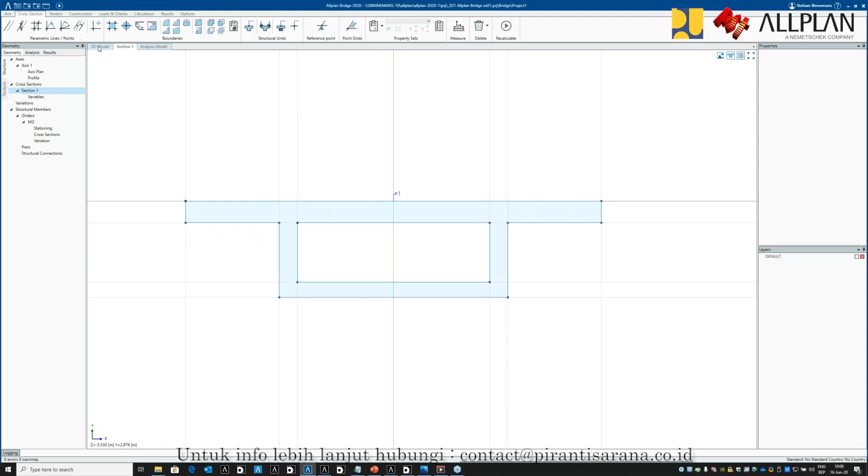So now I can create an additional boundary on this point, for example, like this, okay. And then I can do also Boolean operations, like we've seen yesterday with the modeling in Allplan, just in this cross section. So the main cross section minus this boundary, and now I get an open girder. So if you regenerate, then you will now have this open element.

So very quick to modify something, very easy to go from an initial design and then add detail to it. I think this is really the power also of this parametric design. You start with something very basic, and then you add information to it. As soon as you know, or as the design evolves, you add more detail to your design, or to your cross section, with the variations, things like that.

So, okay, let's continue maybe here with a pier. So I create a new cross section, and I will call this pier. And this will be also simple. Let's say I have, again, 2.2 meters in one direction, 2.2 meters in the other direction, and a width or thickness of the pier, 1 meter, 1 meter, and create a boundary. Okay, just go over the points, and then select that this is also a structural unit. Okay.

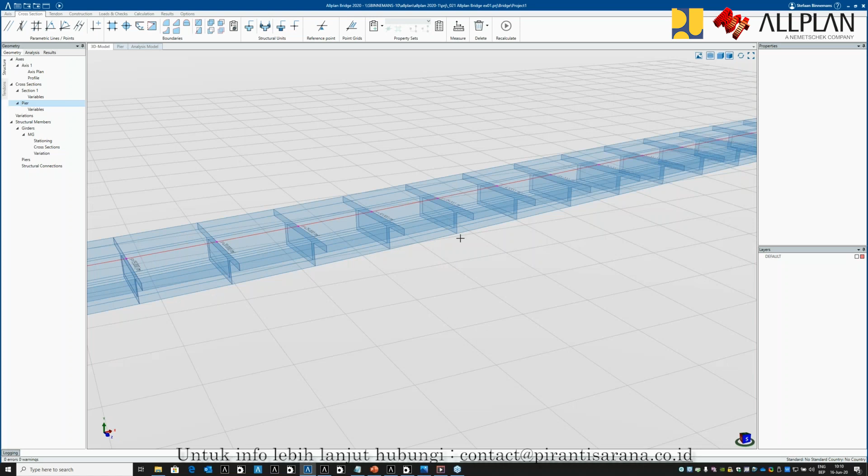Now, before I can assign the pier, it needs to have a reference point, and the pier will be attached. In this case, the top of the pier will be attached, can be with an offset, to the bottom of my deck somewhere. Let's say in the middle I have one, so that would be in 55. If I would like to add it here, I need to have reference points to make the link between the pier and the cross section. So in this section, main section of the girder, I need to add reference points.

So reference points can be used for tendons, can be used for smart placement in Allplan to put a lamppost or a bearing, for example, and can be used to make a connection with another element in Allplan Bridge. So place your reference points at the center, P1, pier, name, you can change this name also. Oh, there was one too many. So you can change this here, also point. So this reference point, one, you can change it. It should be placement in Allplan. You can define this right here.

So now I will regenerate a 3D model, and then you can see now there is this reference point, and this can be used then for the generation or the link of the pier with this station. So we'll create a pier, new pier, select the reference point. So select this reference point here, and now you can choose, similar to the cross section, your section. And let's just click somewhere. And here I will say I want to have it with 0 would be then the reference point at minus 0.5 or something. So that gives me a half meter for a bearing, for example. Can be less, can be more, can be 0 if you want it to be.

Okay. And then the bottom, let's say, will be, so I just click somewhere and I would like it to be 15 meters and with steps of each 3 meters. So that will have something like 5 steps. So here we have the different steps. So we have now a pier, very simple, and a bridge deck. And this pier is linked to the deck. So if anything changes, that would also have influence on my element.

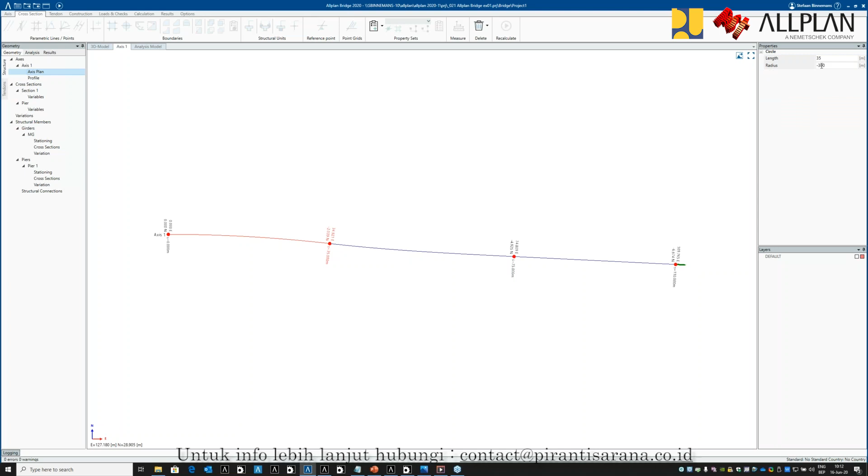Okay, so let's change the axis again. So this works for the horizontal axis, the vertical axis. So you can go always back to your initial design. The first element you created can be still handled parametrically and will have effect on the other things that you do. Okay, now next step would be this variation. So the height of the deck.

Height of the deck. In the section, I need to add a parameter. So let's first add this variable to it. So it's the length, and let's say this is just height of the section. And now I can define this to this line. If I don't add it to anything, it will not be used, but now I will add it to this line. You see now something strange happens because the main value was 0.

So I just set it to 1.9 again, regenerate, and now this is main height 1.9, taken over from this parameter. As soon as I regenerate my model, nothing will happen here because of course it's still a fixed value. If I check the variation tables, then you will have this value right now. And this is what I've shown also in the beginning.

You can do this manually now. Set any values to it. Here it should be, let's say I will exaggerate a little bit, 5 meters. And then you can generate it, and we will see that we get a model that is something like this. Strange, not correct, but you can have control over these values just by adding one parameter to the section. So this is now the height, and then I put this to 8 meters. This is not what I want.

I would like to generate it, and I would like to also make sure that here I have something additionally. The connection with the pier is not like this one point. It has a flat surface or fairly flat surface to make the connection with the pier and the bearings. So I will add now additional stations to this point.

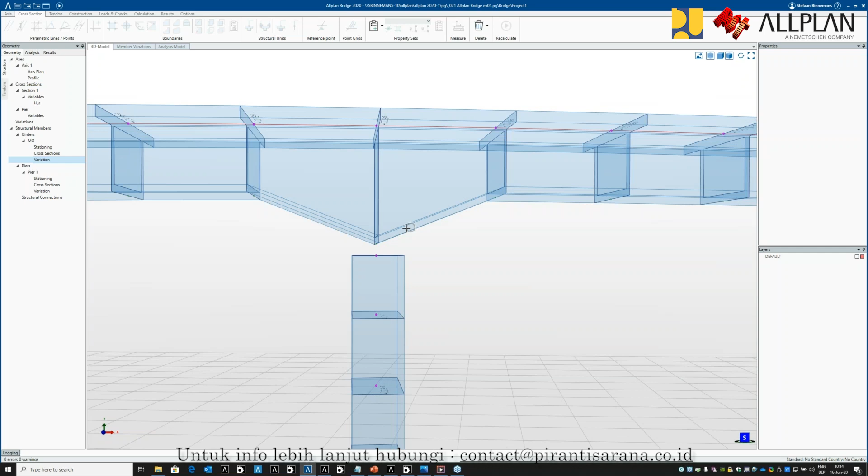So in the main girder, I will say I need the station at 52.5 meters and another one at 57.5 meters. So if I check here, you will now have the 2 more stations added to it. They're not yet used because I didn't define the parameter yet, but now you can see you have an additional station, so no need to assign them from the axis; you can just add them whenever you model something. And here I will now define a variation table.

So a new table for the height of this section. And the height of the section is defined by setting. X is the length or the station point along the axis, and Y is the actual value being used for that variable. So I will start at 0 with 1.9 meters. And the second point will be 40 meters because it will still be flat.

And then from there on, the next point is this 52.5 that I just inserted, and this will be 2.5 meters. So this is the variation that I would like to see. And then there will be a flat surface of about 5 meters between the two on top of the pier, at 57.5. 70 meters should be again 1.9. And at the end, 110 should also be 1.9.

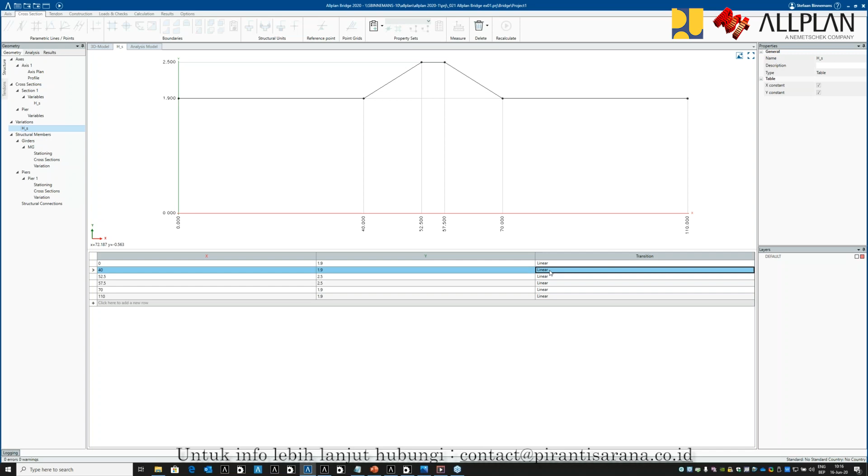So now we have something like this, but I would like this curve to be gradual or parabolic. So I can set a transition from point 40 to the next point 52.5. You can set it to be parabolic, and it should be horizontal at the beginning, like this. And then the next one from 57.5 to 70, I would like to be horizontal at the end. So this is the variation.

Okay, now if we check the 3D model, nothing will happen yet because I need to assign my table to this variation. So you have full control over it. First, you assign a variable. You can use it just within the section to control multiple elements, assign values to it, or you can control it with a variation table, or both of them at the same time.

So I can still just drag and drop here. You see it will be applied, but I can still say, no, this should be 10, for example. So you still have control over each station and the variation value at that point. Here you can see it now being calculated along the variation table: 1.9 and 2.5 are the values I entered, but in between it is calculated from this parabolic transition.

So if I insert another station, it will be automatically calculated. So if I would now apply, then we will see here that my 3D model will now have this gentle variation where we have this 1.9 meter going to 2.5 here.

Yes, so let's do something similar for the pier. So for the pier, I first need to assign a variable to it. So variable, let's say this is pier width. And the pier width default value is maybe 2.2 meters. And then I can assign this value to these parametric lines.

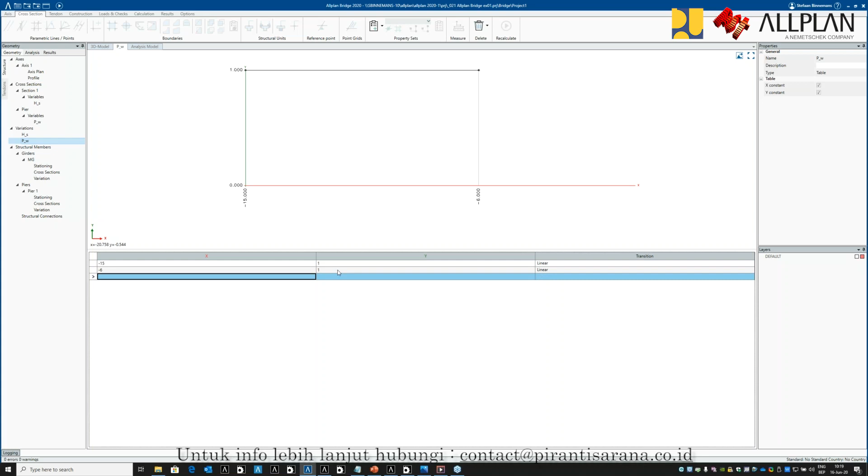So next step here, again, new table. I will use the same name, doesn't need to be, but easy to understand. And then I start at -15. This is the starting point, the bottom of the pier. And the value here is not 2, but let's say 1 meter. And then at -6, I have also 1. And then at the top, which was -0.5, that was correct. And here I will get now this 2.2 meters.

And again, you can set it like this, or it should go from this point parabolically, horizontal at the beginning, like this. It could be the other way around also, so you have different possibilities. Now I just need to check if these values correspond more or less with what I've written here. So -15 to -6, and then at the top -0.5.

Again, variations. So if we regenerate our model, the variation will be included, and I'll just drag and drop, and then you will see here also being calculated. And then a change here, and then our 3D model will be adapted.

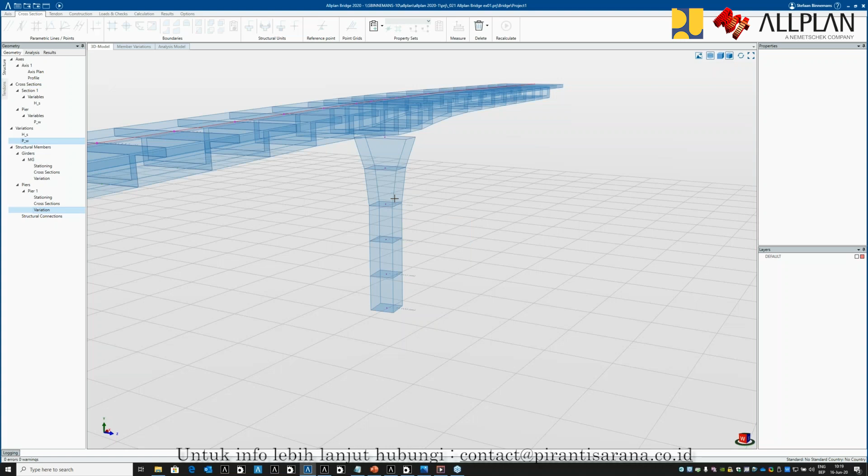Yeah, so we've done a couple of steps, going from axis definition in plan and profile to get the 3D axis, cross-section definition, apply to the axis, pier cross-section definition, apply to a reference point, and then adding variation tables to control how this element behaves.

Maybe one small thing, not too much into detail, for the tendons. In the cross-section, you can add a point grid, add it to a reference line, define it here, and then with this you can choose the tendon points like I've described before, to add them and to create tendons along this geometry, and then they will follow this reference point and also the grid definition.

Okay, that's it for this step-by-step example. I have one thing left to show you, and this is the interaction between ALLPLAN and ALLPLAN Bridge. So we'll set this up, and this one here. Maybe there are some questions, Siswanto, that you would like me to answer.

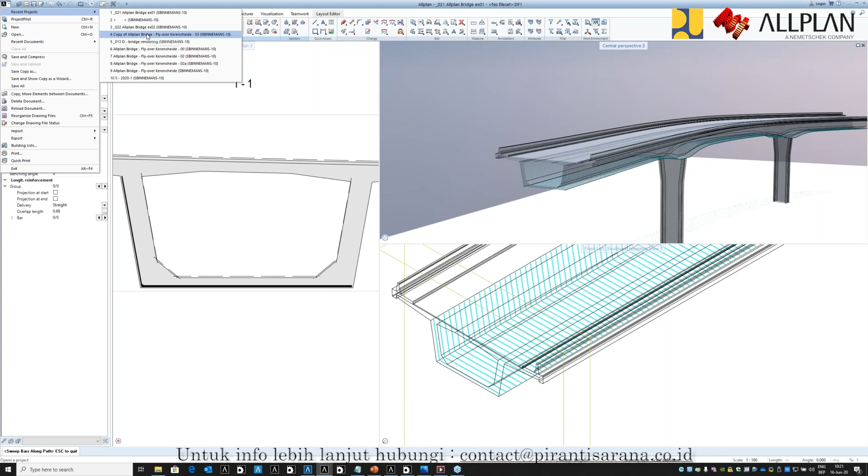Yes. Can you create an abutment in ALLPLAN Bridge? I think you showed me once, yeah? Yes, certainly. What we showed yesterday, right? The abutment, I did some freeform modeling. Oh, you mean in ALLPLAN Bridge? ALLPLAN Bridge, yeah. Yes, certainly. Sorry, I had misunderstood. You can define this in ALLPLAN Bridge. Any component. I think there are examples also included that have this abutment.

Let's see if I have here one that I opened recently. I think this one here. So you can define this. It's just an element. You can do transversal axis also. And then within the transversal axis, you see here, for example, this is then the abutment being generated. You have the piers. There are a lot of tendons included. You can see here all the tendons. So this is then segmental cast. And this is then the abutment.

Yeah, I will make it like this maybe. So this is certainly possible. It then means you need some variations in cross-section, similar to the main girder. You need it also for the abutment. Yes? Yes, okay. That shows that you can create the abutment.

There is one question for the alignment. Can we import data from Civil 3D for horizontal alignment, profile, super elevation? And can all of the variables be imported or only horizontal? Only the axis. So that means horizontal and profile, both of them, but not super elevation.

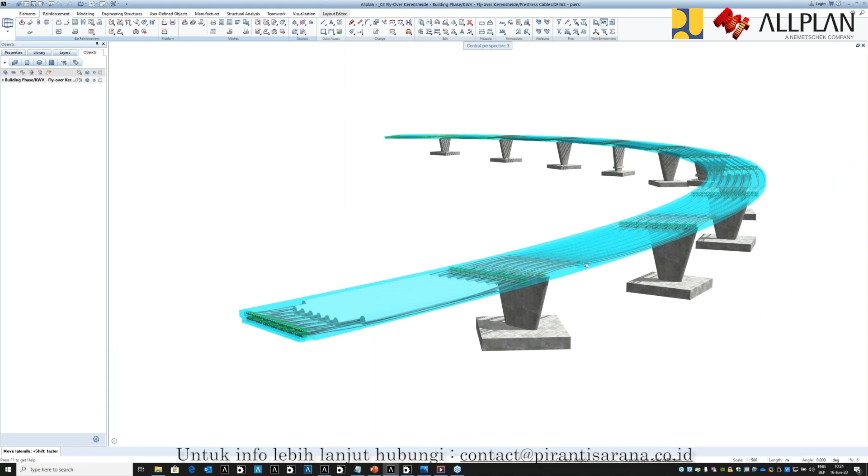Okay, so we have this segment, and maybe I make this a little bit smaller. So I have this prepared, and everything we see here, with the visualization, the deck, the car, the tendons, also the lamppost and the guardrail, this is all generated by ALLPLAN Bridge. There is nothing modeled in ALLPLAN here. And you see this is now straight and flat, no specific design. And I will open ALLPLAN Bridge from this model.

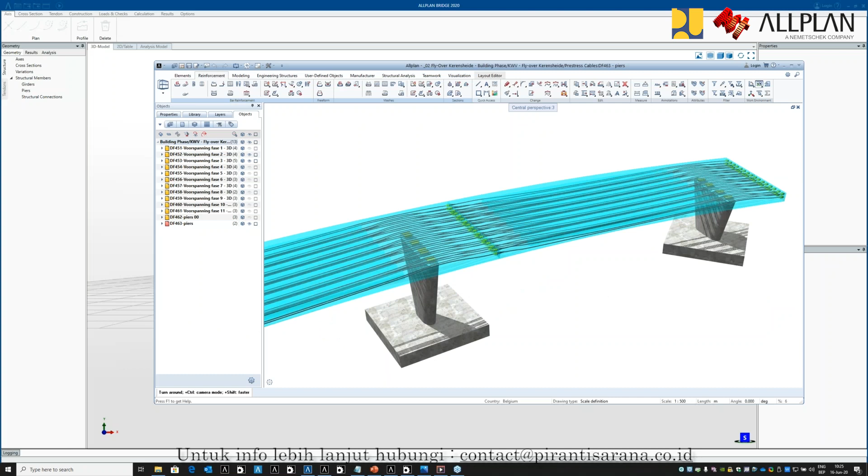What I would like to do is get it to the point where you have the super elevation, and one pier rotated 45 degrees, at least the foundation. Something else, the different lampposts are being set. So some modifications that we've seen in the other examples. And now I would like to update. This is the ALLPLAN Bridge model with all the tendons included. There are quite a lot of tendons. And you see this is now a straight model. I would like to get it to the state where it should be and show as an example how this works to get this model updated.

So this is now the link between ALLPLAN and ALLPLAN Bridge. In ALLPLAN Bridge, I will do some changes. We will change the axis because now this is fairly straight. So I will change the curve to have it come to 300, so it's a more visible curve. And I will also change the profile, because now this is flat. If we check in Allplan, this is flat. But if we check in this one here, you see that the height is also being changed.

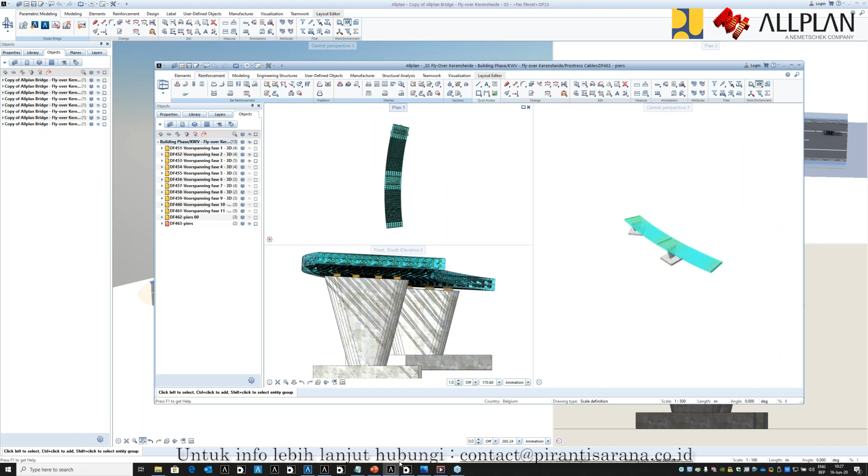Let's see if I can give this multiple viewports, so we can see this also here. Animation view, you see that there is a curve, that it has super elevation and that it's not flat. Okay, so we have now the different views here. We need to get this curve and the super elevation in, and the heights for the profile. At the start this should be 8 meters, and the end should be 5.5 meters. And I would like to have a curve in the center with a radius of 3000, like this.

Now let's update this change in ALLPLAN. You will see now it's curving here, and the height is different, but all the tendons just follow, right? There is no need to define anything. If the correct definition has been done for the tendons, then everything will just adapt to it. And this can be quite complex, because above the pier they're close together, but then they spread out again. This is defined in these variations.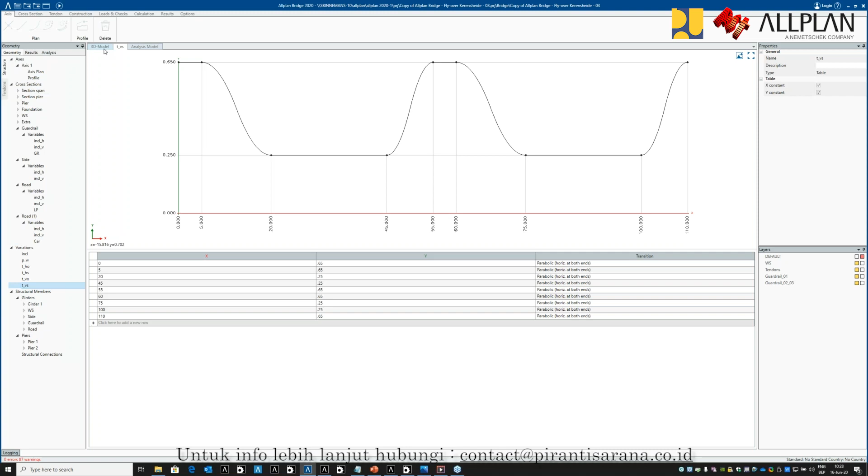In variations, we have different profiles for the tendon. Horizontal offset, and I think this is the vertical offset, is the spacing between them. This is the curve for the tendon height. And then we have another one with the spacing. Depending on the station, they will be 25 or 65 apart: at minimum 25, at maximum 65 centimeters distance. This is what we see here. This is the closest point above the pier, and in the middle there is a distance of 65 centimeters. All these parameters have been defined. If something changes, they will just adapt to it.

So these are also tendon groups. You see they also are straight at the end to connect with the other tendon. So this is a very detailed design and it is being transferred when you do the changes.

Okay, now let's do the super elevation. In the cross-section, here, there are these weight savers, and then the angle is also included for the inclination. So if I go to the table here, I can set the inclination. The 3D model is still flat. I will set the inclination or super elevation to be -5 at the start. At this point it will be -3, and at the end it will be 0.

Yes, so I think this is above the pier. We have some slight change. So if I set it here, now we will see the super elevation being generated. Yes, so here we see that for all the tendons this is adapted, so they keep their position within this deck boundary or bounding box. The same thing for the pier.

So for the pier, here for the cross section, I will define that this also has this angle, so -3 there, and for the other pier at the end, I will also say this is minus 4.6. Where do these values come from? You will be able to see this when you check the inclination of the main girder, or the variation. At this point, you see the inclination where the second pier is with this value. So you can reuse that for the inclination at the top.

Okay, there is one more thing I need to do here. In the final design you can see that this foundation is rotated 45 degrees, because there are highways crossing in different directions below it. This can still be easily done. Right now it's just 90 degrees, perpendicular to the axis. I would like to rotate this, and I will do it here in the pier variations of pier 2. So set this to minus 45 degrees. So I will rotate the foundation block at the bottom, independent of the pier. Okay. So now let's regenerate.

Okay, maybe one more change before I do this. We also have the lampposts in Allplan here. You see there is a car. I will not touch the car, but you see the lampposts. Maybe there are too many. I would just like to have a lamppost here and not this one, not this one. And in Allplan Bridge, this has been defined by a variation here. So along the stationing I put a lampposts, and I don't want to have this one. So you can just delete the value or write 0. Oh, this should just be 1. So now there are 2 lampposts less.

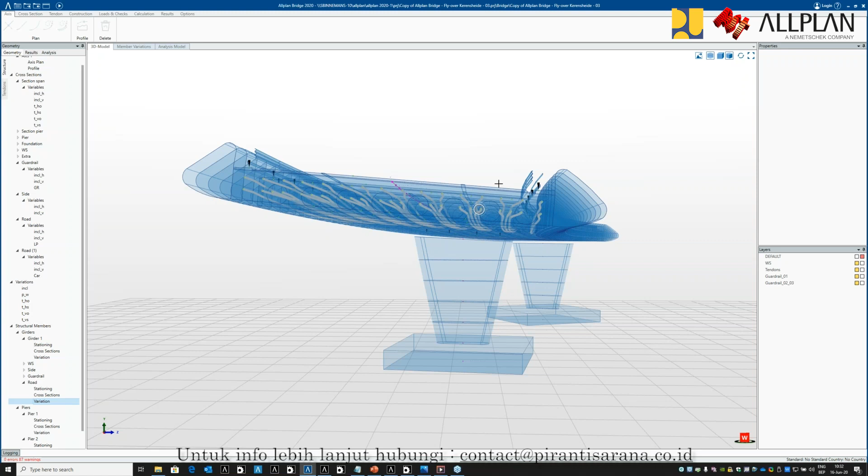Regenerate model. Not much changing here except for these black arrows, right? So now there is one here, one in the middle, one at the end, but no intermediate anymore. So I think all the changes have been applied in Allplan Bridge. So let's update in Allplan, and now we'll see the model being updated. It will adapt the super elevation.

Let's check here. Super elevation, then the radius will be changed. We have the part here where the foundation is changed. We have the profile height, which is changed. You can see from the other direction. We have the piers, which should be different. And all the visualization that we have done already in Allplan will be kept. So the textures that have been added to the model, there will be no need to assign them again.

So if you check here in Allplan, this is a titanium texture. This is concrete. The road has a surface assigned. This is not something you set in Allplan Bridge. You can assign materials, but this is something I've done afterwards in Allplan to make it good for visualization. So all the changes have been made on all the parameters. It's quite a complex change, and this model will, with one click of a button, adapt and be updated with all the changes done in Allplan Bridge. Of course, depending on the amount of information included, and this is quite a detailed model, this can take up to a minute or 2 to apply.

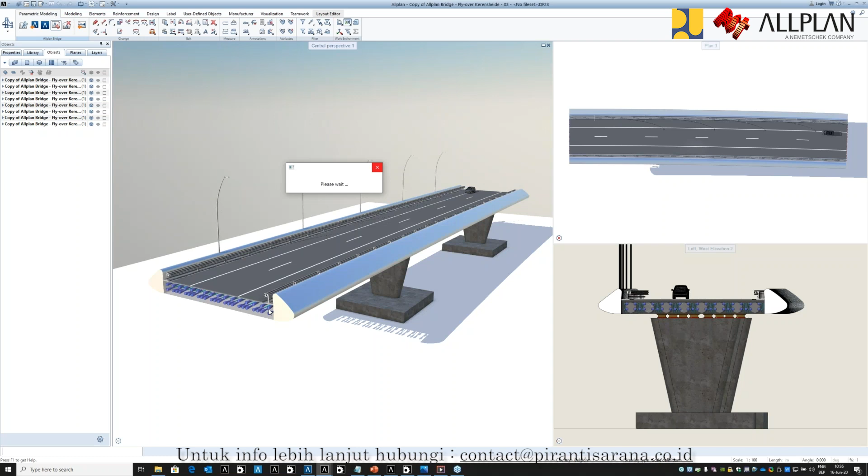So here you see now all the changes have been applied. So just one click, only waiting for the update to be finished. So you have the deck that changed. You have here the super elevation being changed, radius. The car, just need to make sure that it doesn't veer off too much because it's almost at the side. So here also the bearings, they adapt to it. The pier adapts. We have this foundation being rotated. A lamppost, number of lampposts has changed, and the position also. So everything is generated from ALLPLAN Bridge.

And for visualization purposes, this is very nice, because if you want to have a different bridge, a little bit quick visualization, there is nothing you need to do. Everything is generated by ALLPLAN Bridge. So where do the components come from? To answer that question, you can have your own library. And in here, you see, there are just bearing blocks, a car, guardrail elements, and these tendons. So maybe let's look just a little bit into the tendons. So if I set here, turn off everything.

So what elements? Yes? Ivan, can you show how you create the road marker, the white colors? Oh, yes, okay. I will first go through this last thing here, just a couple of minutes more.

So we have the elements designed in ALLPLAN Bridge. So we have the main girder with the bearings attached to it, okay. You have the guardrail. There's an element, which also has the smart symbols. So if I check this, you will have the solids coming from ALLPLAN Bridge, and then the smart placement, like the bearings, they are set with the smart placement in ALLPLAN. Same for the guardrail. So the rail itself is generated by ALLPLAN Bridge, and then the smart symbols are placed by ALLPLAN.

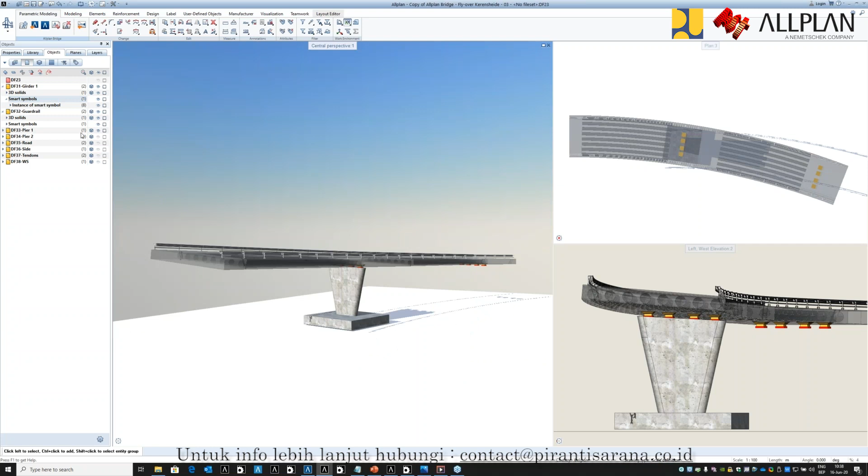And then we have the pier elements. Oh, there, the piers, yeah, just one pier. So this is a different element. You have the other pier, with the foundation being rotated. Let's say the weight saving blocks here, they're also included because they are at specific positions. So this is also something that you can include from ALLPLAN Bridge, and each individual girder or element in ALLPLAN Bridge will be an individual element in ALLPLAN. And then we have the tendons. I would like to focus here on the tendons. Let's turn off the guardrail here.

So the tendons, you see, they align very nicely, and they follow the orientation of the tendon. So you can set if the tendon needs to be straight. You see, this is almost horizontal. The other one goes a little bit down. These objects follow automatically the axis of the tendon. So in ALLPLAN Bridge, you define for a tendon, for example, let's check here just one tendon. And then you define for this tendon here in the middle which one is used. Oh, I'll just select that one here.

You define here which anchor is used. So an anchor with a different type, with a start and end, because there is a different anchor. And then in ALLPLAN, this anchor is placed. So from the library, you have your end anchor and starting anchor, depending, of course, on how the tendons will be stressed continuously. So here you see end and start being connected with each other.

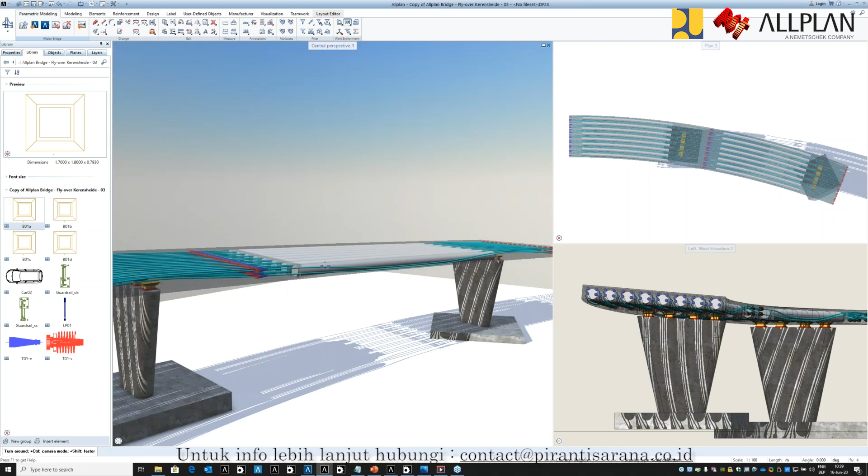Okay, let's go to the last part. So we have the side. This is a different kind of profile, also generated in ALLPLAN Bridge with the side as a cross section, based on the same variables. For this, you just copy the original cross section, so you have all the right parameters or parametric lines, and then you just define the shape around it. It can easily be done with a chamfer, round, or like this.

And then the last point is the road, guardrail, road. The road has some different elements. Is there also a smart symbol? Yes, that would be the car and the lamppost, but there are some solids, and depending on how it's generated in ALLPLAN Bridge, you can have many different elements. So here, you see, this is an element, this is an element, this is also an element.

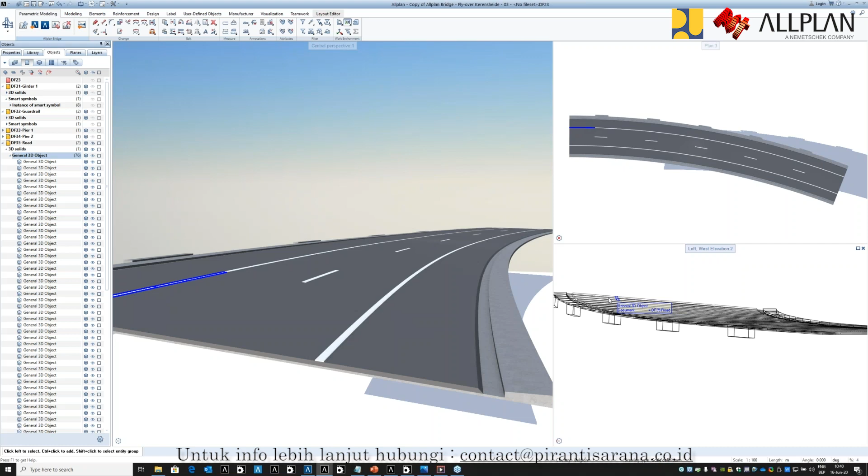How can you play with that? Let's say you would like to give this a different color in ALLPLAN. I can just turn off everything here and turn on the elements you would like to have. Depending on how you manage or handle them, they can have different attributes also. Then you can say, I would like these elements to have a different color or a different surface. You can give them a different color, and then they could look different.

I think I picked the wrong element, sorry. So by selecting the element, you can give it a different color or different texture. Let's say I would like to assign a different texture to it. Whenever you do this in Allplan, the changes you make attribute-wise, adding information, or visualization-wise, will be kept. So let's say I want to make this concrete, just a drag and drop. Then the next update you do, this information will be kept.

So you can do the visualization in Allplan and still update your model in Allplan Bridge, send it or do the update in Allplan, everything will be changed, but the visualization you created will be kept. This is a nice workflow where you can do the parametric changes but still keep the visualization in Allplan. Okay, I think this concludes my part of the presentation.

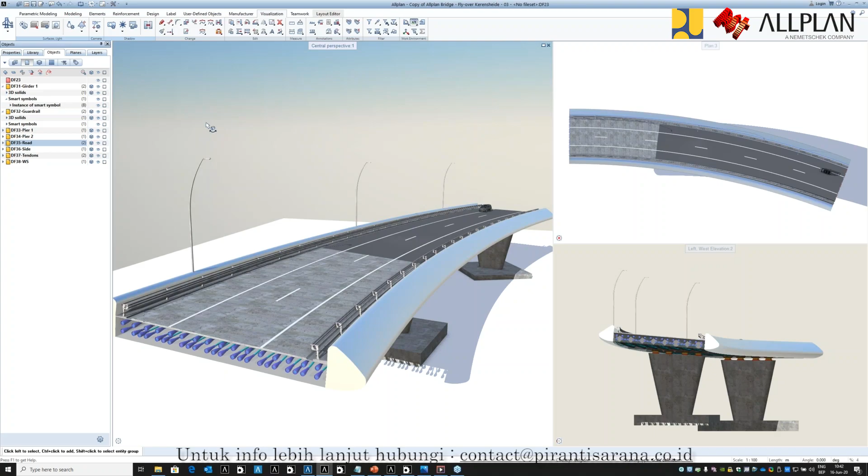Anything else, Iswanto? I'm okay. So I think we can give it to the PUPR for the link. But before that, Arvid, can you make me a presenter? I need to share something. Or I can do it myself. I don't know, let me try. Okay. Yes, it seems to work. Yes, I can see your screen.